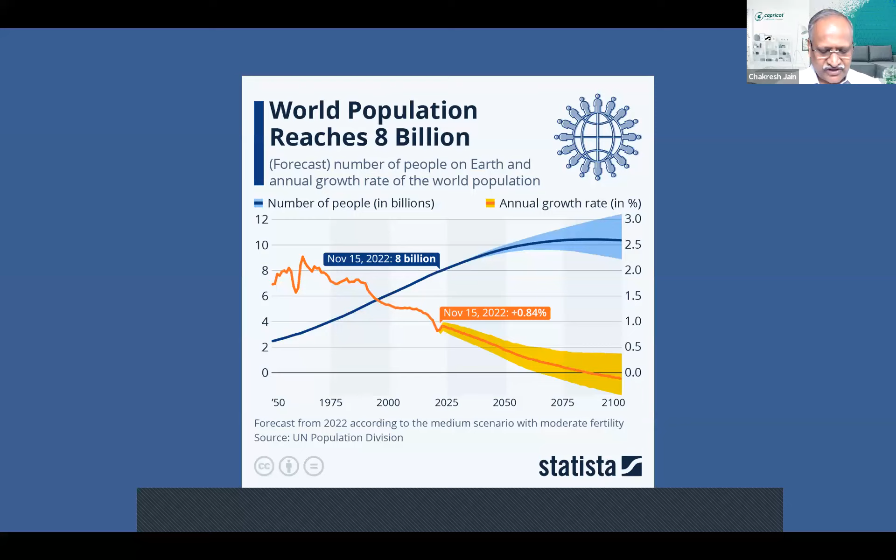The biggest challenge we are facing on this planet is we human beings ourselves. I'm sure all of you remember this date, 15th November last year, when as a human population we crossed 8 billion people on this planet. This is a global number. Of course, we are in India and we are more worried about India, and as a country we know we are somewhere around 142 crore population.

Our population has been growing. Let's take a very simple example of what is the impact of this population growth on us in the construction industry - that's why I'm showing these numbers. Let's presume that we as Indians are growing at about 1%. The fortunate part, as you can see in the graph, is that in the 80s and 90s we were growing more than 2%, but it has now reduced to about 1%.

So let's take a simplistic figure that we are about 142 crore and growing at 1%, which means we are adding about 1.4 crore Indians every year, or approximately 40,000 Indians getting added every day. So that's the number of Indians increasing.

Now, as part of the construction industry, this translates to needing to construct a home for each Indian being born, which means around 8,000 to 9,000 homes are required to be constructed every single day of the year. Look at the quantum of the problem we are facing in our country.

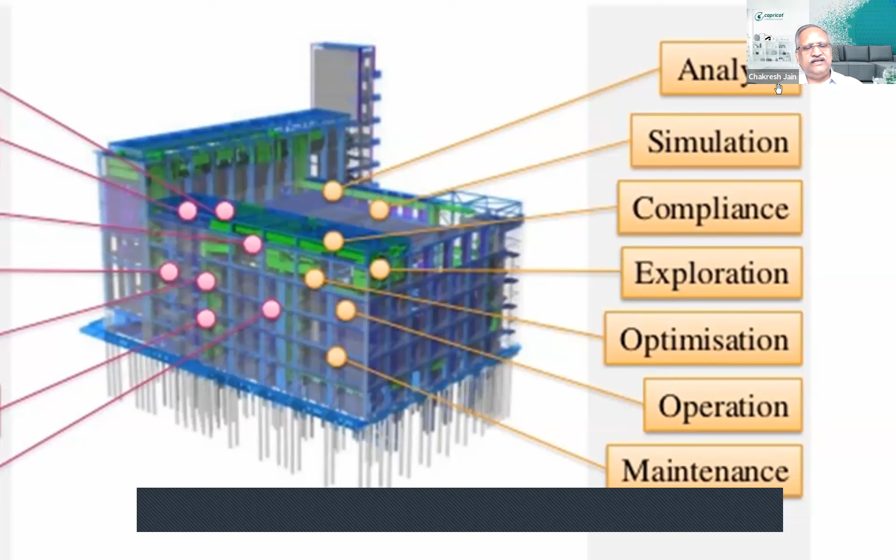And then that's why I should be able to explore my building and finally give a very optimized design. And so after doing this building, this same data I should be able to use for my operation and maintenance. So this is what I need today from a BIM, and that's what a good BIM software will offer me. But this is more about a building and physics and other parameters of the building.

But we know designing and constructing a building is a process, and a very complex, time-consuming process, like from the program to conceptual design to detailed design, etc. And we have to take a lot of decisions in that process. And today what is happening, because of the complexity, a lot of decisions are to be taken, and it takes a lot of time to take these decisions, and as a result the projects are getting delayed.

So another important requirement is, how can I speed up this process decision and bring all my stakeholders onto one single page? Can I bring all the stakeholders together so they can work on it? And in the long term, once I start digitizing this information, it will also become something like my shared knowledge. And as today we hear a lot about big data analysis, artificial intelligence, machine learning, all that will only become applicable once I have sufficient digital data. So this will also help in future to improve my buildings as I capture more and more information.

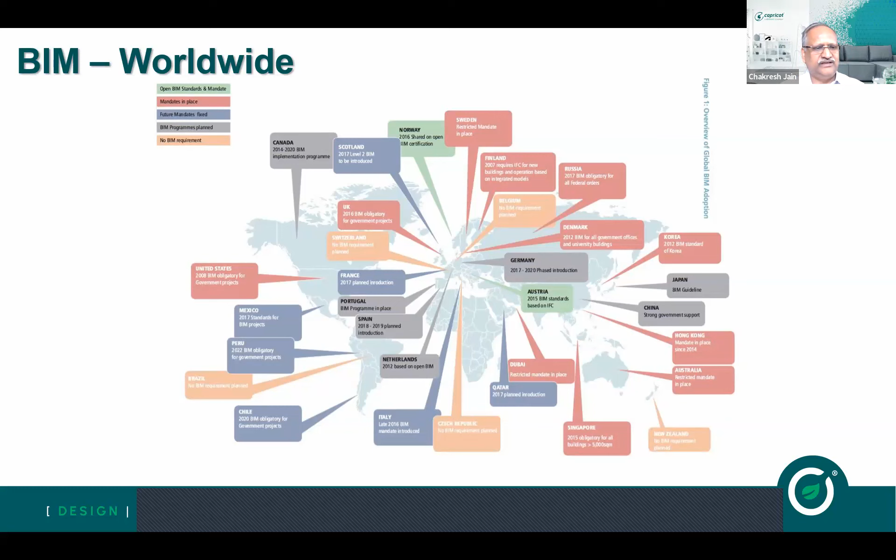So basically, we have to leverage technology for design using BIM. Similarly, in construction, lean construction processes are helping improve construction on site. Projects are now delivered using integrated project delivery, which brings a lot of people together. So using all these digital tools is what's helping us improve our projects.

Thank you. Now we get to an even more exciting part of the session, where we'll cover a practical demonstration of how BIM works. For that, I'll hand over to Shoaib, who'll work with his team on role playing a real life project. It's a demo project, but it shows how a real project starts from architecture, then structure, then MEP, and finally design coordination for optimum design management in a BIM environment. Over to you, Shoaib.

Thank you, and good afternoon everyone. I'll share my screen. I think it's visible now. So now I'll introduce my BIM team and we'll simulate the process of how a project is delivered on BIM.

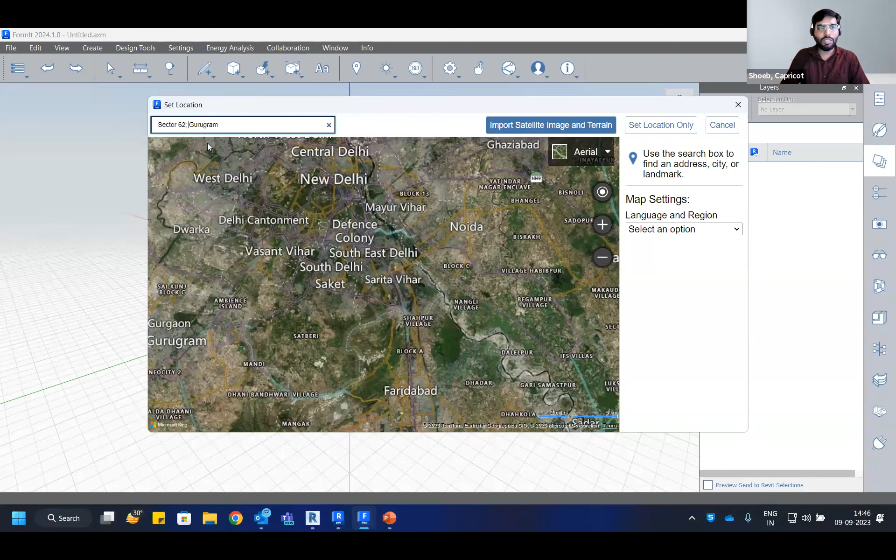So I'm going for the location. It actually allows us to pick a location anywhere, either by putting coordinates in degrees and minutes, or by writing down the location, such as Gurugram. It's showing me some results. I can be more specific, such as sector 62 Gurugram, and I get similar results. Or otherwise, if we have a location on Google Maps or Bing Maps, we can just put in the coordinates and it'll grab those accordingly.

So now I've set up this site, this piece of land, as my site plan. I can simply import not only the image shown here for reference, but also get the terrain data out of it, for contour creation. So I'm clicking on 'import satellite image and terrain,' which allows me to pinpoint the area and set up the building context.

If I'd like to include adjacent buildings to show the entire neighborhood, I can zoom out and set the area accordingly - so I'm setting it to this level, for example, I think this much would be fine. Once done, I finish importing, which imports not only the site context but also the terrain layer. Since this is Gurgaon, it doesn't have much contour, but if working on hilly regions, it will show the exact terrain. Anyway, I'm switching off the terrain layer for now.

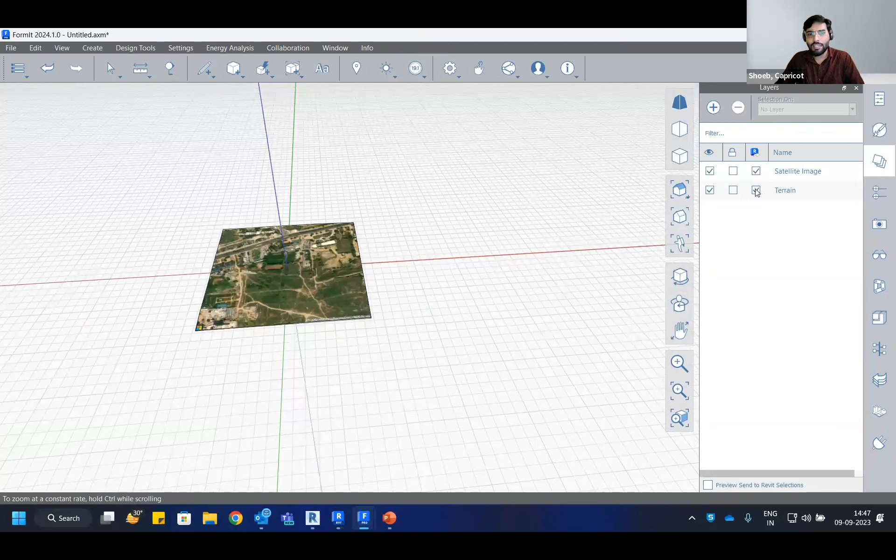So it has multiple layers, and now I'll start modeling over it. To start with that, we can use multiple unit systems, since multiple consultants work in multiple unit systems. The BIM ecosystem supports multiple unit systems. For example, if the architecture consultant is working in feet and inches, and the structure consultant is working in a metric system, and the MEP consultant is working in another metric system, maybe meters or centimeters, since BIM ecosystem works in 1:1 scale, we may switch between them at any time.

So I'm starting with meters, for example, and just creating some shapes here. You can start with 2D lines like AutoCAD or any 2D software, or you can start directly with 3D shapes. For example, if I put up a cube here, I can select this cube, stretch its faces to any shape, and get a form out of it.

Later on, I can also play around with this form. For example, I can interact with its edges, and also interact with its corners if required. I can replace the edges with another edge and get different shapes out of it. If I'd like to draw on the faces of these edges, that is also possible, so it's quite easy in that sense.

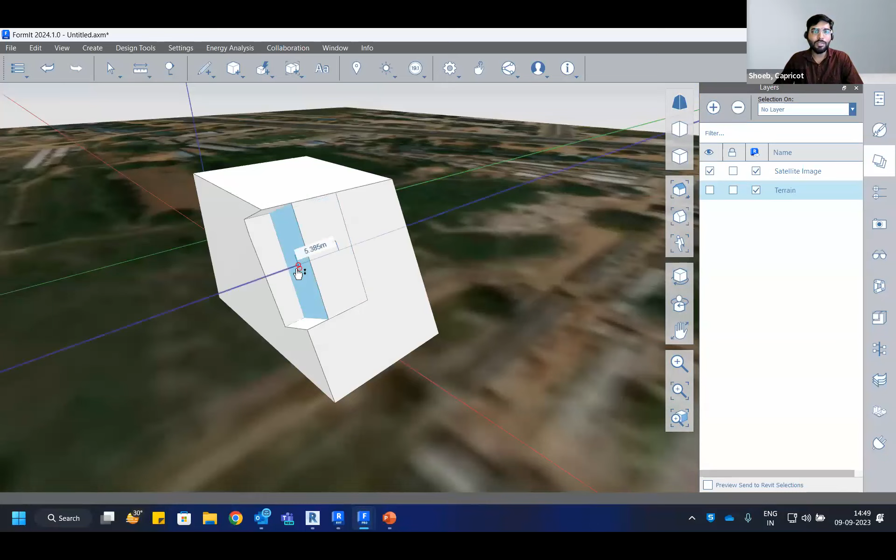For example, I've drawn this portion here, and I would like to push this portion away from this part, and a new possibility has opened up, something like this. I can do that on the other side as well.

Anyway, sorry to interrupt you. Yeah sure, let's go a little bit slower, there are some internet problems, some people have issues, let's try to go a little slower in audio and video. Sure sir, thank you, sure. So in this case, okay, I'll try to be a little slower.

So like I started with shapes, we can start with different shapes, or we can start with lines also. Most of you are already familiar with CAD-based software where lines are used. I'm also starting with, let's say, a simple square. I can freehand draw on screen and make decisions, and I can also put up exact values if required, like I'm doing in this case.

So it's a building footprint of, let's say, 13 by 71 meters, and I'm going for 5 stories, so I'm taking around 15 meters of height. I'm just creating another shape here of a similar size. You can go not only rectangular, you can also, if required, go for other shapes as well, such as circular or other interesting shapes.

So I'm taking a kind of similar building in this case. And obviously, not only linear buildings, you can also rotate them as per your requirement, so all of those features are here.

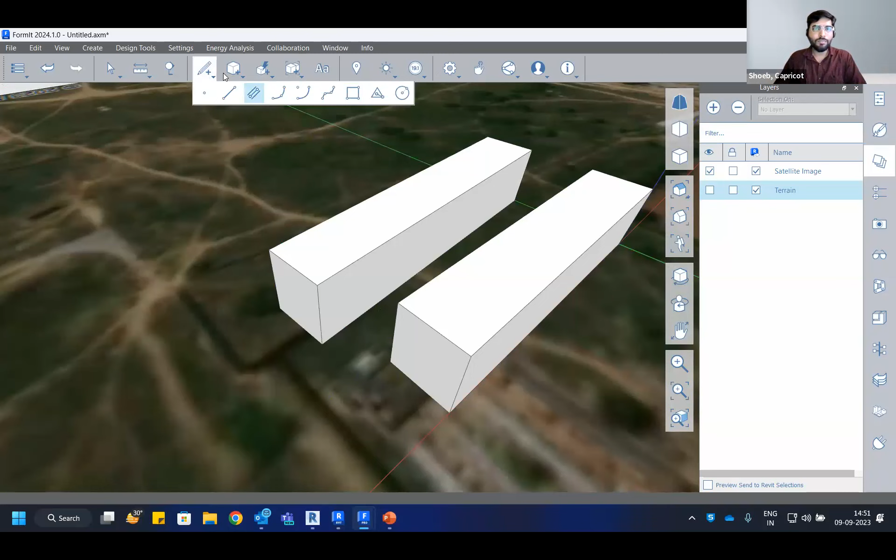So now suppose these are two building blocks, one slightly rotated, and these are both connected via some corridor. I'm trying to connect it with a corridor, and suppose this corridor is not of full height. It has got some passageway below it, suppose a 3 meter or 3.5 meter passageway below it, so that people can pass under it.

So this is the conceptual form. Once a form is completed, you can put up material to it. I'll just show some material capabilities, it has a bunch of materials already available, and you can also create your own material. For example, if we need to put up a concrete facade, suppose one side is fully concrete, this entire block has been converted to a concrete block.

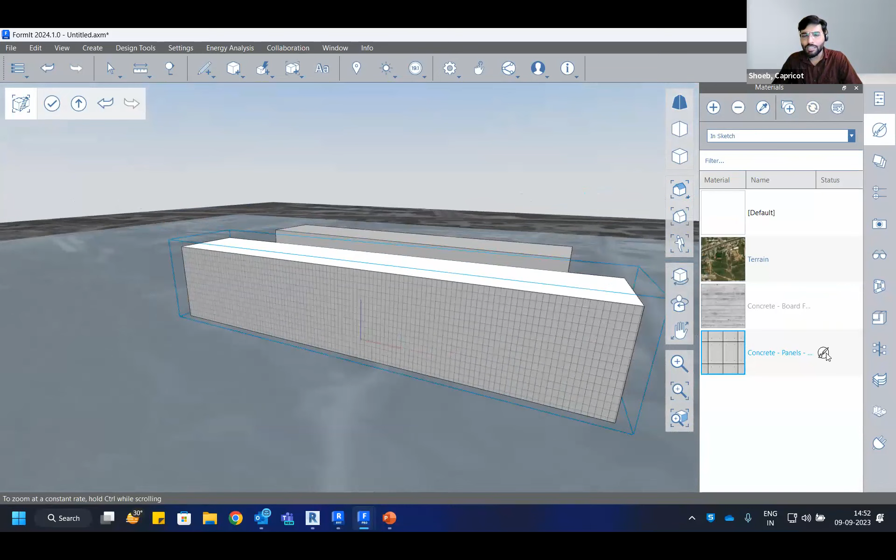Obviously we'll go side by side, so I can also get into different materials. Suppose the surface of this side is concrete panels, let's say precast panels are to be placed in this case. We can also change the size of the material as well. Anyways, you get the possibility here.

Similarly, since this building form is created for 5 floors, keeping that in mind, you can also add multiple levels to it. So I'm adding levels in this case. Suppose the first level, I'm adding at a height of 0.

Okay, another level I'll add at 3.5 meters. It is fine. You can also change the height from here, suppose if you need to change it. Similarly, another one is going for 7 meters. Now I'm keeping the rest of the levels at 3 meters each.

So I'm just keeping it at 3.5 plus 3 meters, that is 6.5 meters. Similarly, I'll add more, that is 9.5 meters, and let's say another level at 12.5 meters. So the first story is 3.5 meters, rest are 3 meters each.

And now we can assign those levels to this entire thing. I'll just simply go to its properties and assign levels to it. Just a minute. And as soon as I assign those levels, you may see the level marking in the conceptual model, and if I select one of the elements in the form, you may notice each level is showing

its area. So it is showing in square meters. Suppose if you want to change it to another unit, let's say feet and inches, then it's just one click away, and you can simply select the components. In this case, building forms and their areas are shown in square feet, as you may notice. So these are the levels, and their areas are shown. So this is that dynamic in this case, right?

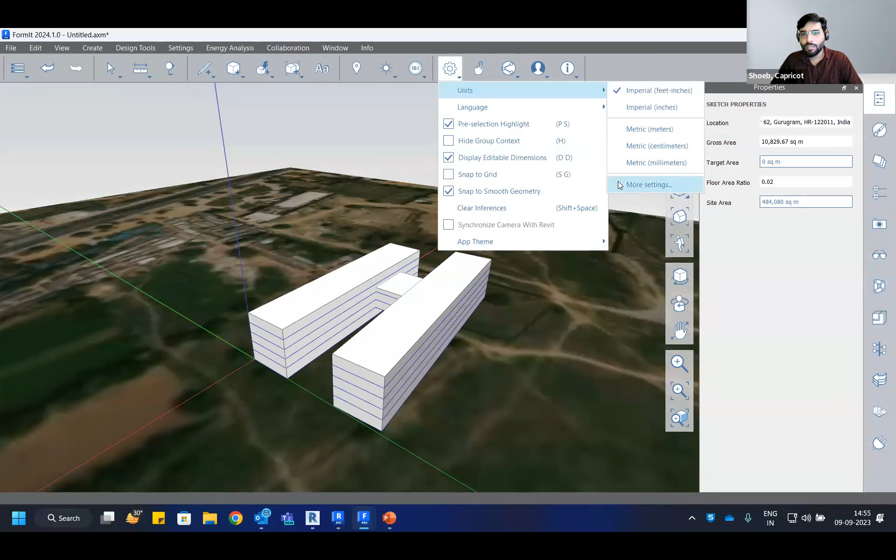So in this case, I'm putting up the site area which is to be designed for this particular site, that is 484,080 square feet, not meters, sorry. This dimension I had in feet, so I'll just simply change it. Just a minute. Okay.

And then target area, I'm setting up to, let's say, 90,880 square feet. So it is now converted. Sorry, this part I need to again fill up because it is just updated.

Whatever site area you have, you can just fit that, and then you can also feed the targeted area which you want to achieve, such as in this case, this is the target area, that is about 20% of the site area. That is what FAR allows me for this particular region. And automatically FAR is being calculated in this case, right? So you can keep track of it.

For example, if I make changes now, suppose if I reduce the height here, as you may notice, FAR starts to reduce. Similarly, if I increase the height here, suppose it's a larger building, then accordingly FAR starts to change. Just a minute. Sometimes it takes time to update, but yes, it updates automatically.

I need to add more levels in that case. So earlier it was 0.19. Just a minute. For example, if I reduce it, you may notice the change in FAR, that is 0.17. And if I now change it back to the original height it was, it will be around 0.24. For a larger building, we need to add more levels. So as per the addition of levels, the form whichever we are creating, we can also track FAR accordingly.

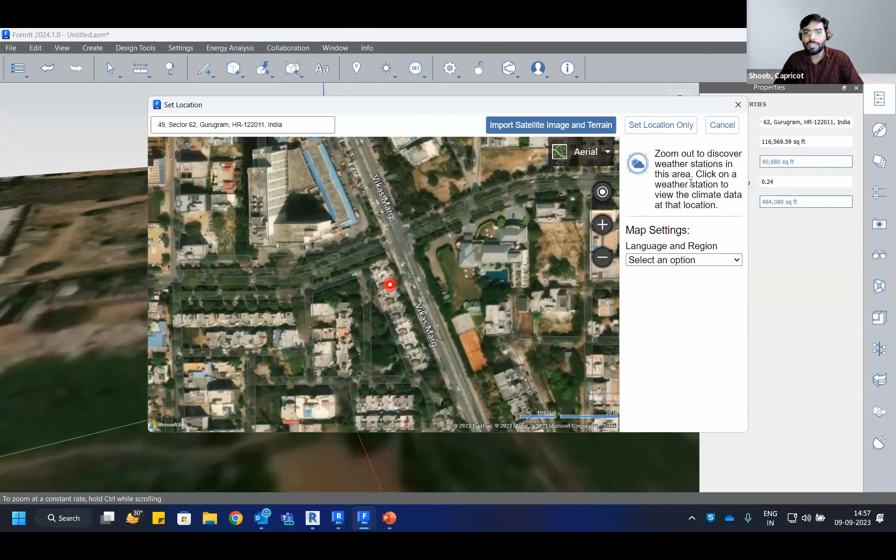So once a basic form is created, you can also run an initial level performance analysis on how our building is going to perform under sunlight, under different weather conditions. So when I set up this location, it not only sets up the context of the site, it also sets up the weather location. As you may notice here, it also sets up the weather station for us. So we not only set up the location in context of the project, we also set up the weather data, which can later be used for energy analysis or HVAC analysis.

So in this case, if I need to run an initial level solar or shadow analysis, I can do that. But to do that, I'll just change the visual style.

I want to keep it as the monochrome surface so we can see the shadows and colors properly. You can also change different visual styles - it has different styles available for presentation purposes. So I'm switching on shadows, for example, and also the sun editor.

As soon as I switch on sun editor, it allows me to simulate the sun location in my project. This sun symbol is at 12 p.m. I can simply drag the sun manually, and as you may notice, the shadow is being tracked. This is how, if we're working with multiple buildings, we can identify the areas which are darker throughout the day, and plan accordingly if we need sunlight at every area, or if we need to keep some areas under shadow.

Similarly, if I run solar analysis, I can choose date and time accordingly, and solar analysis will start. For example, I'm taking today's date, although we usually design for the future. I'm taking the month of June - June is fine for me - for this year, 2023. You can write it down, or choose the year accordingly.

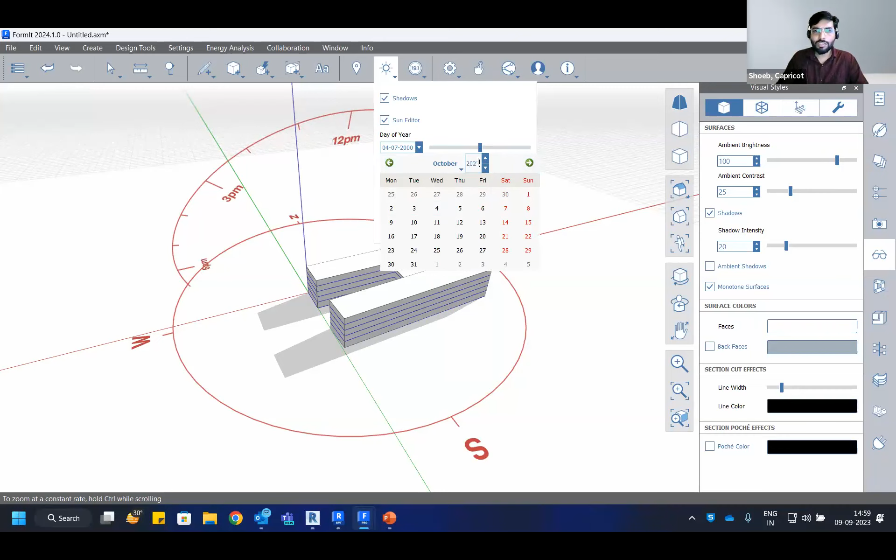For some reason it's not updating, but no issues - sometimes this takes a moment. Anyway, this weather data is kind of similar for the entire year. You can change the months and dates accordingly using the slider, and for year you need to change it from here.

Similarly, we can change the time from the slider as well, or manually position the sun. For example, I'm keeping it around 10:30-ish a.m., or maybe around 3:30 p.m. - that's the peak hour for sunlight, the most sunlight usually. I'm testing it for the month of June, maybe this month, 3rd June, and I'll hit solar analysis.

It will start collecting data and allow me to run solar analysis on a monthly and yearly basis. I'm going for monthly basis in this case, and I'll select the surfaces where I want to run the solar analysis. I've selected the entire project. You can also select faces - for example, I only want to run solar analysis for this face individually. That's also possible.

For example, this face is crucial because it's going to place some glass on it, and I want to decide if the glass needs to be more or less reflective. I also want to decide the type of glass according to its SHGC value - how much solar input it takes. So we can decide this for a particular surface as well.

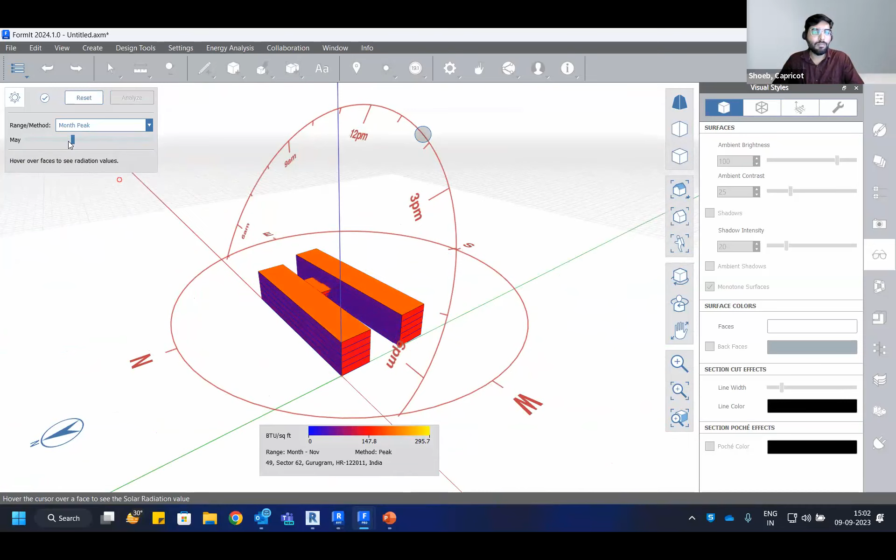You may notice different surfaces are highlighted using different colors for different months. I can change months from here - in March we get lesser sunlight, in February even lesser, and for November, December even lesser still. If I go for May, June, July, we'll get the most sunlight at the roof and facade. We can also get it for the years, so I'm moving within months.

I can also get the cumulative - that is, average sunlight for the entire year. This is how you can decide at the very initial stage if the orientation of the building is correct or not. Once decided, you can simply push this model to detailed design software.

This is the conceptual design software, so I'm just saving this - you can save it at some location. I've already saved it, so I'll show you the almost completed model.

This is the model where we already have terrain and satellite data available, so that satellite data and all those levels can be transferred. Let me save it - no issues, I'll save it again. This was from yesterday's input, so I'll save it on the desktop for today. Conceptual form, I've just saved it.

Now I'll go to detailed design software. The BIM ecosystem has, like I said, multiple software.

So this is part of the collection. In this case, you can simply use that same model to do the detailed design. Although this software not only supports the architecture part, it's a multidisciplinary software.

I'll just show you the basics. You can choose multiple templates out of it—these are some predefined templates. You can also create your own standard template as per your discipline. If you're a mechanical engineer, go with a mechanical template. If you're doing entire MEP, go for the systems template. If you're an electrical engineer, go for electrical template. Similarly, there are architecture, structure, and construction templates.

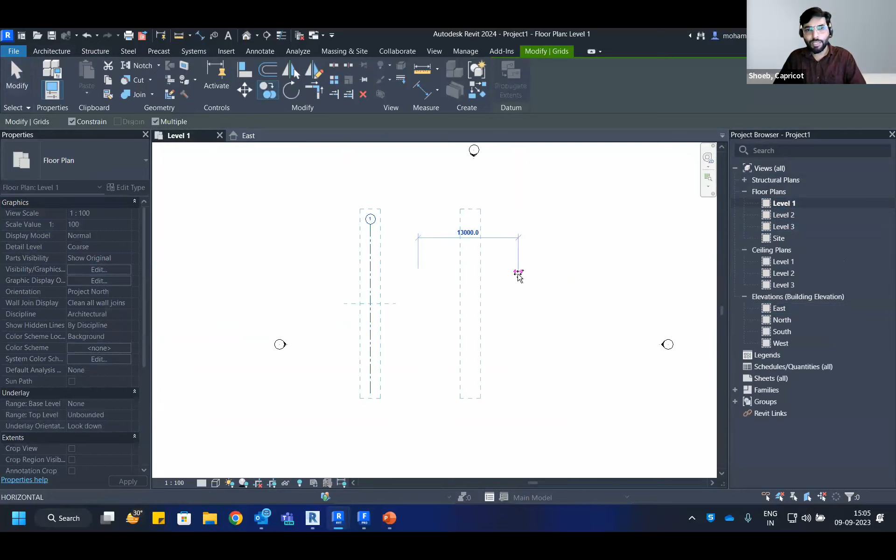I can put up grids for a project. So suppose this is the first grid I'm putting up, then let's say at every 6 meters, I'm putting another grid.

This same grid can be used by other disciplines as well—suppose the structure engineer needs to place grids, they can also use the same grid, or they can put up the grid in this file and send it to the architecture team. So both ways it works, and usually structure and architecture teams work in collaboration.

Anyway, suppose on this side I'm going for, let's say, 8 meters of gap. So these are some grids I have placed, and now I can start creating walls for the architecture purpose. If a structure person is working, they can start with the structure columns and structure components, which Vatsal will cover in the upcoming session.

Anyway, I'm going with the architecture wall, and suppose this wall is starting from this level and going up to the level above, so I'm going up to level 2, and I'm just placing a few walls here.

After placing walls, I can simply place interior walls, and suppose the assembly for interior walls is different—in that case, we can choose another wall from the given list. If we need to create our own interior block work or interior partitions, or for exterior walls too, we can simply modify these components.

It has properties that allow us, for example, if I choose one of the interior blocks, which is 100 in this case, you may notice it has the preview for it, and it has 3 layers—it has concrete mesh in between and gypsum on both sides. Similarly, we can go for wooden partition or glass partition if required.

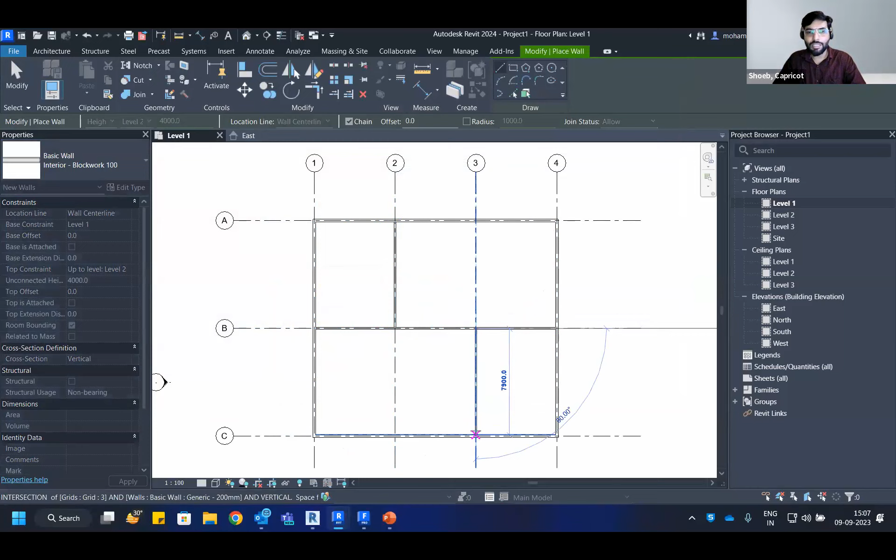Anyway, we have the choice to select the material at the initial stage, and later we can also modify these assemblies as and when required. For example, these are a few rooms which I've placed. I can simply control the visibility of the layers—so these are different layers.

So I'm just keeping the grids layer a bit lighter, so that I can focus on these wall layers. And as soon as I'm creating all these walls, a 3D byproduct is also created. So this is the 3D view, as you may notice, I've just turned it into shaded.

So 3D is also being created side by side, and I can keep it side by side. So I'm keeping a side by side window, 3D on the left hand side and 2D on the right hand side. So like we used to work in AutoCAD, we used to work in 2D, similarly I was working in 2D view, and 3D was automatically being created in this case.

So suppose now if I need to add doors and windows in this project, I can go for the door tool. I can place a door here, choosing one of the sizes, or I can load it from the library. I'm keeping a door here, similarly I'll keep one door at this end, and to enter this room I'll keep a door here, and a door here. So as you may notice in 3D view, doors are automatically being placed.

Similarly, we can also put up windows if required, and obviously it is required in most projects. I can choose the size of the window, and simply place that.

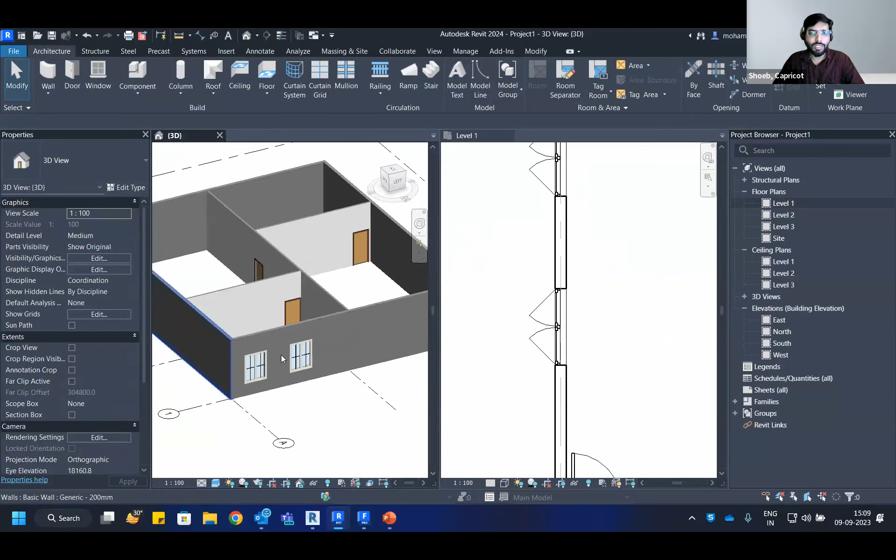You may notice here, the door placed in plan view is showing a 2D line additionally, which shows the swing of the door. Similarly, windows are also showing the swing of the casement window. But if I check it in 3D view, it shows the 3D preview of that. So in this BIM ecosystem, software is smart enough to change the representation as per the view.

So in plans, mostly we create floor plans, and as per floor plan graphics it automatically updates the component. You can also control the graphics as per your design standards. Suppose in some offices you need to show this opening line of the door in dotted line, then that is also possible. This is the default which I am showing. Similarly, we'll place more windows, and accordingly it will allow me to.

So we actually work like in AutoCAD in this case, a little more automated, like we place blocks in AutoCAD. Similarly we are working in the same manner, but 3D is automatically being created. Not only 3D, if we need to cut a section through it, I can go to view and choose any new view to create. Section is one of the additional views for this BIM software.

So I'm creating a section. I can also control this section's direction and its extent, to what extent I want to check my section. I can also rotate my section if required. So a single section line can also be used for reviewing the entire project.

Anyways, so I'm going to this section view. It accumulates all its views at one place, and this is the section view which can be seen in this case. I'm turning it into shaded.

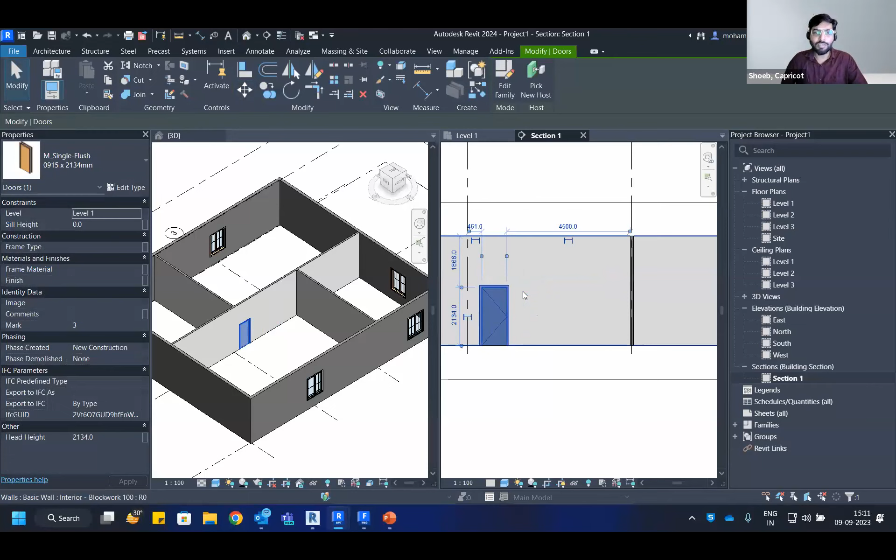And if I shift it to the left using arrow keys, it is as simple as that. Or you can use the proper move tool, and specify the dimension - suppose I'm moving it by 3 meters, and it moves accordingly. So in this case, in both 3D and 2D view, this door has been shifted. This is that door, right?

So I hope you got the idea that this ecosystem allows us to create views which are connected with each other. So if we are making any changes in the 2D view, 3D view, or any section or elevation, subsequent views will automatically update. Not only this, it also allows you to get quantities and all.

So the rest we'll do in the project which we brought from the conceptual design stage. This is how you start from scratch in this software, or maybe you can get a conceptual design model from another team, or from the senior architect, and then keep moving forward. I'm using the same template again, the architecture template, and I'll link that conceptual model into it.

For linking, I'll just link it like a CAD file, which I just need to change the format. So in this case, I created this conceptual building form, and I'll just open it. Import units in this case would be feet and inches, so we can also work with dynamic units.

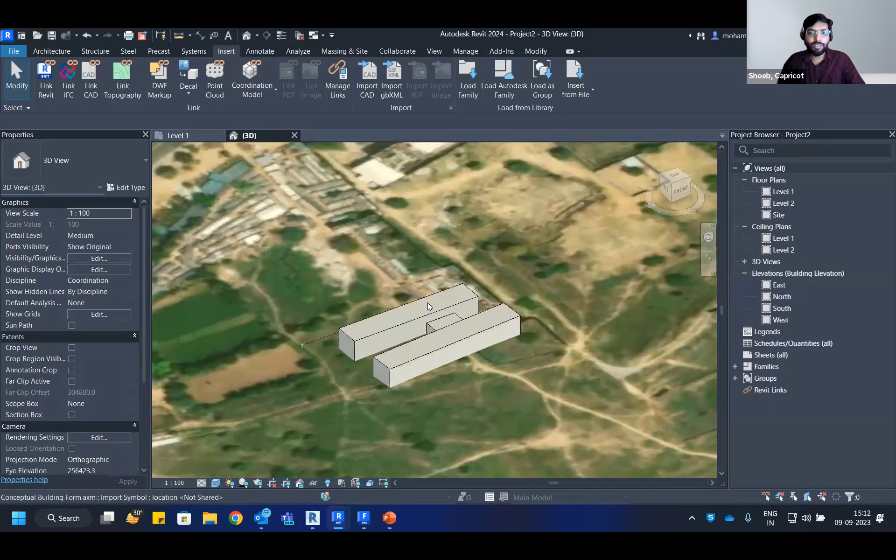I'll open this, and as soon as you place it here, if I switch to 3D view, and turn it into shaded or realistic, you'll notice that the site context has also been brought here. So the site which I chose for Gurugram, along with its contours, are also brought into it. For now, we are not going into the site development detail, but you get the idea that the entire thing can be brought here.

Anyways, I can still control its layers which we created there, such as the satellite imagery layer. If I apply it, it will switch off, and the terrain layer will switch off accordingly. So this is the layer where our component is created.

Now, what we can do is pick up its edges. I can also create levels in this case. I'll switch off the terrain layer in this view as well. This is the elevation view, and there are two levels which are already placed.

The first level was 3,500 and the rest were 3 meters each. It was created in such a way that there were 5 levels, 5 stories basically. You can put up dimensions as and when required, and also make it print ready.

If I turn it into shaded, this is the basic mass. If I need to convert it into actual building forms, let me go to another elevation to properly manage its levels, since these levels are overlapping with the building form. Anyway, it's a very small thing, but you can adjust it accordingly. If I adjust it in 2D view, it is also adjusted in 3D.

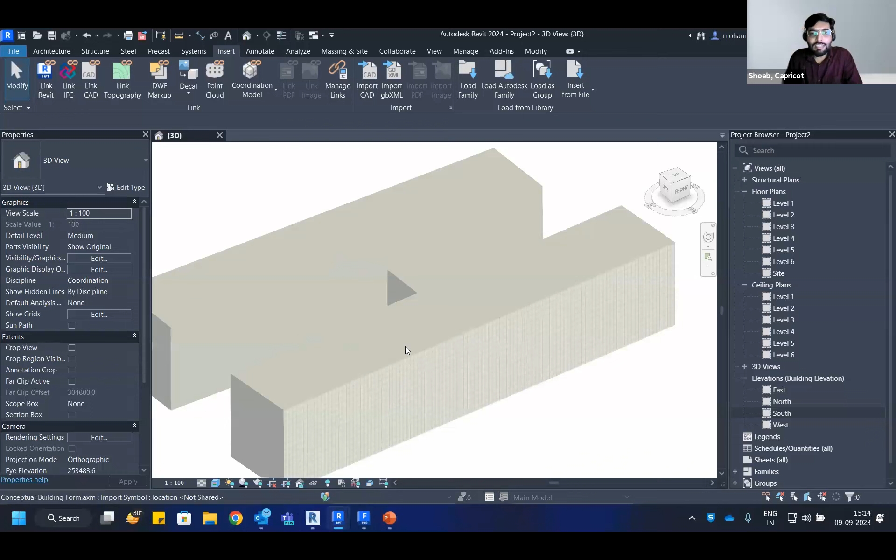Earlier it was overlapping. Anyway, now moving ahead, I can go back to plan view for this conceptual design form. Suppose I'm choosing the site plan, and I can go for building components such as wall, and pick its surfaces and lines. I'm just choosing the type of wall which I'm going for.

Let's say in this case, I'm going for some kind of brick wall system, and I can simply select the edges. As you may notice, these edges are being converted into walls. Later on, in 3D view or 2D view, we can control its height and all.

So suppose if I go back to 3D view, these walls which I just added, I'm connecting them to the entire levels, from level 1 to level 6. So these are those brick walls, as you may notice, because that was the intention to place it. And then I can also place roofs and all.

If, for example, you need to place some glazing, we have options to switch between. So I'm going with, let's say this time, glazing wall. We have options available, and I can simply select the edges of it. As you may notice, a glazing wall is being selected in 3D also.

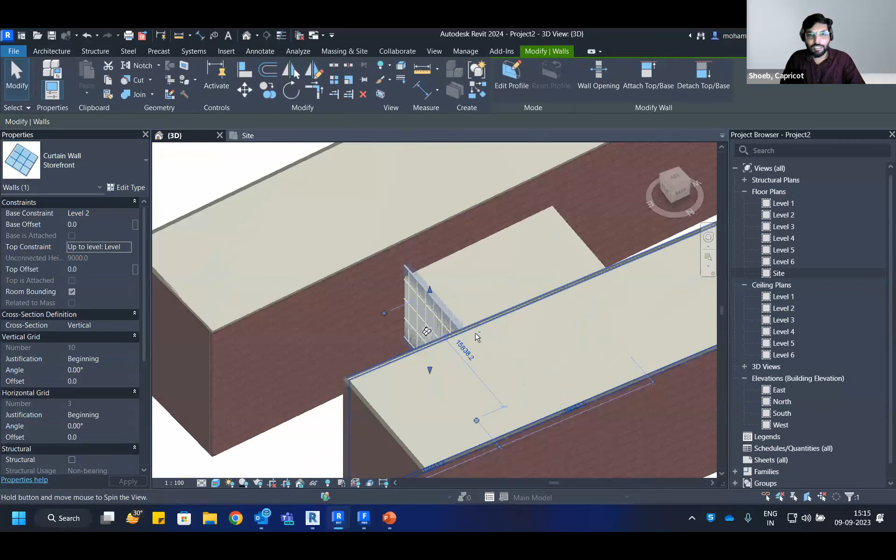So you can work in 2D as well as in 3D if required. Suppose the height of it starts from level 2 and goes up to level 5 in this case. So accordingly, we can adjust. Similarly for this side also, it is started. So this is the kind of connecting corridor in this case.

And so the entire design can be carried through, so you won't lose anything in the process. Usually when we switch from one software to another, we lose a lot of data. In this case, since all of these tools are of the same BIM ecosystem, whatever we created in the conceptual design tool is now brought here and further detailing is done.

So I've already created the model completely, so I'll just simply switch to the model. We have added a few doors and windows and a few elements into it. Obviously you have already seen how to place windows and all.

But if you are into programming - although not everyone is - if you want your software to automatically place many things, if you want to run an automation in your design, you can take help of the software's capability of handling basic programming. Obviously this is not for everyone. If you want to place your windows and doors manually, that is also fine, and that is how most people work. But if you want to get more output in lesser time, you can also automate the process.

To automate that, I've just recorded a few sessions for automation. So this is how a script of automation looks like, right? This is the automation script. Those who are interested can also learn this later.

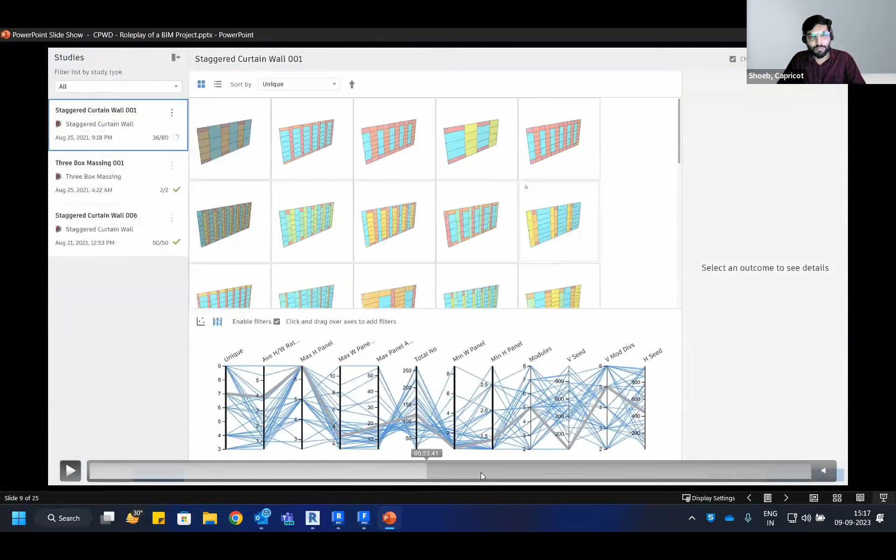So what we did, we actually picked up all those walls which we created and divided them into multiple panels, and then we placed windows in between. We got some panel options in this case - these are different options we played around with, and this is the simulation of the process. You can also run multiple design options into it.

For an architect, this is a challenge - we produce 3 or 4 options for the client, and sometimes it takes a lot of time because a lot of rework is done. But by using some automation tools already available within this BIM ecosystem, you would require some programming knowledge, and then you can also run multiple design iterations out of it.

This is the simulation of that - so this is how I actually came up with these facades. Especially for this white one, we actually ran those simulations.

Anyways, so this is the completed project. Like I mentioned, we also placed internal walls, and these are the floor plans which can be shown in this case of the same project. This is the architecture part of it. Obviously there's a structure part, which later Vatsal will cover, and the MEP part, which another person will cover. We also get a reminder for saving the projects in between, and it's a good thing.

So I've already placed internal walls, I've also placed text in between. We also can use it for tags. Like I showed in elevation, we can also put up dimensions, and this entire floor plan is kind of ready. For presentation's sake, we can also add colors to it.

So for example, if I need to add colors according to the spaces which are placed here - this is the game room, this is unit 1, this is the RA unit, this is the laundry area, this one is the toilet area - we can color our areas as per the name of the rooms.

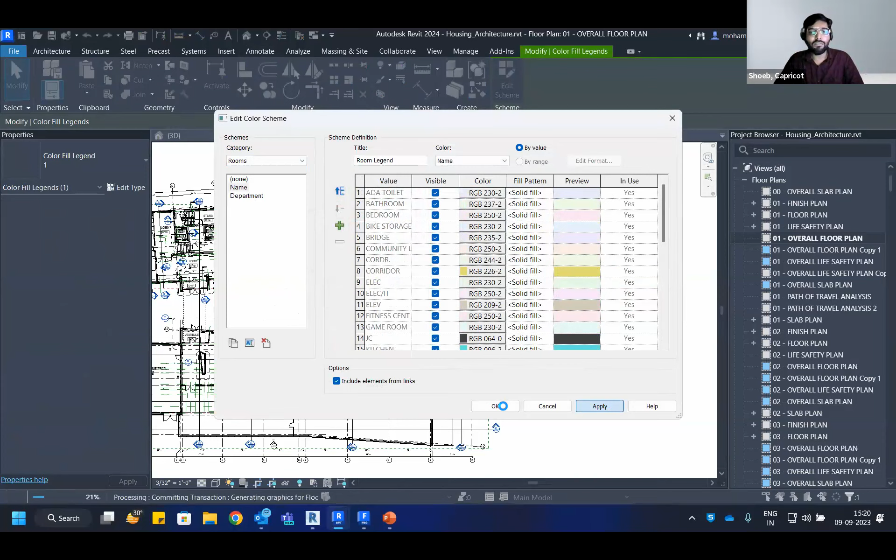I'll just accept it, and once I accept it, our entire floor plan will be colored automatically. So it is calculating, and once it is colored, a legend with colors and our entire room - oh sorry, I think I mistakenly switched off the layer of the colors room. Just a minute.

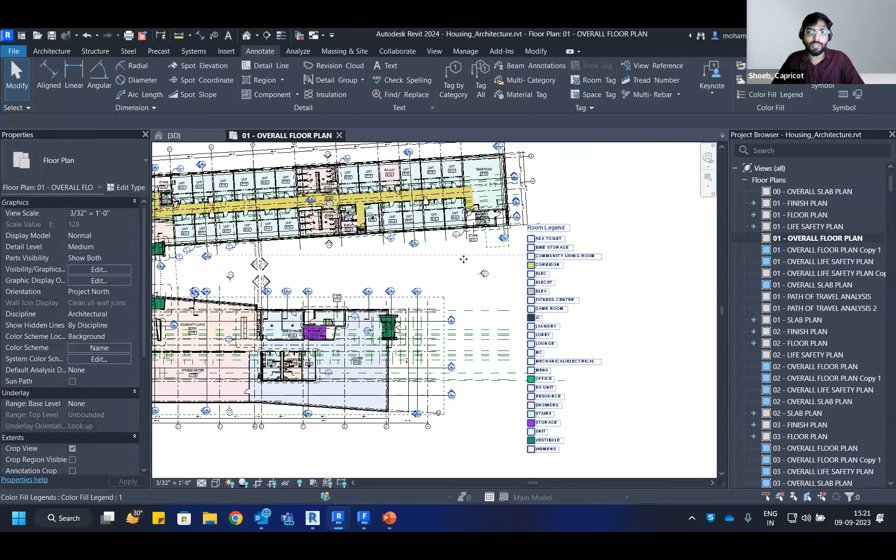It converts to the area, and now different areas, similar areas will be colored similarly, and different areas will be colored with different colors. So it is again recalculating as per the areas, and it will show you all that. It is going live, so it takes a few seconds. And as you may notice, as per area, it is showing.

You can also set up the range for the area, like 8 square feet to 12 square feet, 12 to 17 square feet, or 100 to something like that. So rather than going by value, you can go by range as well. Anyways, for now, I'm just keeping it by name, but I'm just showing you the possibilities which are available in this ecosystem.

So once it is done, you can also put it on a sheet. It is now recalculating according to the names, I just changed it. Yeah, so now once it is completed, I can just put it on a sheet.

So to create a sheet, we can just simply take our standard title block. If in your company you have your own sheet format, you can take up any sheet format and place it there. I think I've already created a sheet. So you have so many sheets in this project. This is the sheet which I created, and I can just simply drag and drop that

floor plan view. It is under the floor plan, and this is the floor plan which I was working on, right, the overall floor plan. So I'm just simply dragging, a simple drag, and I can just drop it on the space of the sheet. It is as simple as that. We do not need to get into the make viewport or similar command. It recalculates, and we can just place our view accordingly.

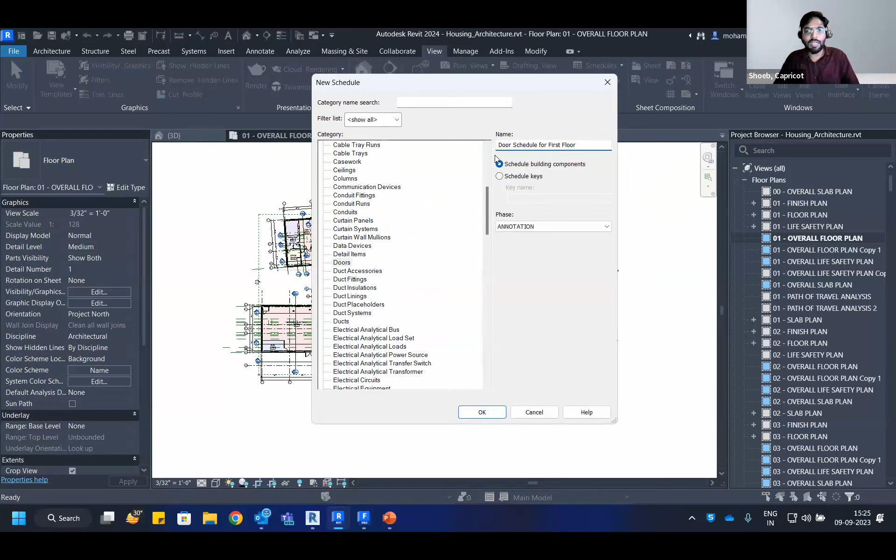For example, I need to get a door schedule, so I'm just creating a door schedule for, let's say, the first floor. I'm only sticking to the first floor, but you can go for multiple floors at a time. So I'm just going for first floor. This is the first floor drawing which I'm showing you. And as soon as I chose the category, I can choose the properties of the category, such as what type of door we are using.

What is the mark of the door which we are using? What is the width of the door? We can also go for height of the door. These are door related properties. If I had chosen column, we would get column based properties. If I had chosen wall, for getting the schedule, we would have got the wall based properties. So whatever category we choose for scheduling and getting the quantities, accordingly properties will be shown.

I'm choosing this much, and I'll also take the level on which the doors are placed. I'm sticking to filtering out, so I'll show you the result first. This is how the entire table will be shown. I'm filtering out only first floor in this case, that is the plinth level, right? So there's plinth level, first floor. Actually I intended to go for first floor, and there are first floor levels available.

So I'm simply adding the filter for a particular level. Suppose level equals to first finish floor, yes, this one is I want to go for. And you may notice these are first floor doors which are shown in this case.

Similarly, we can also add more fields there. Suppose if we need to add cost and all, we can get the cost out of it as well. So suppose I'll also sort it as per. This is how we use Excel. There are many features of Excel which are inbuilt in this case, and we can also export it into Excel when and if required, right?

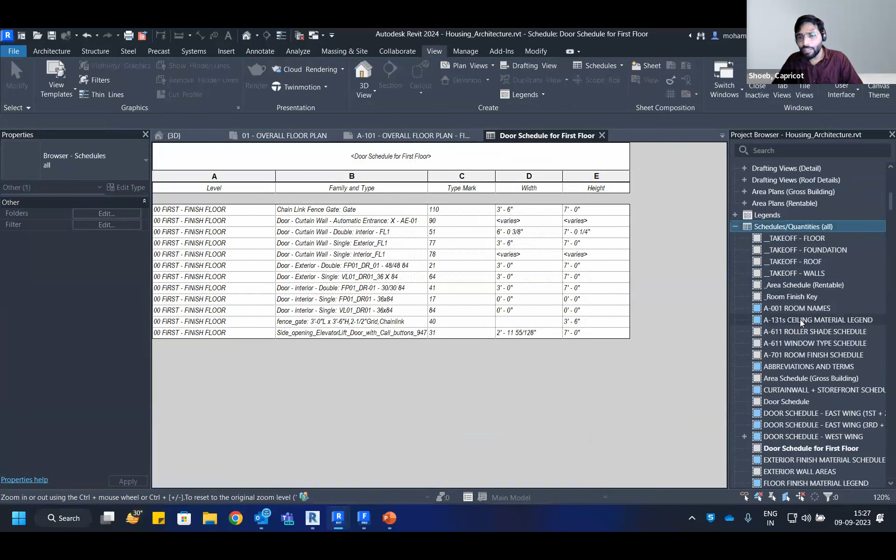Similarly, we created multiple schedules already, so for a project we can get multiple schedules. We already have a ceiling material schedule, so these are 3 types of ceilings which are placed in this project. This is the east wing door schedule, so we have also segregated door schedules. This is the east wing third floor schedule, this is the west wing door schedule. There are 2 wings you have already seen in the conceptual design.

So the idea is this is how a detailed quantity can also be taken, and this can also be placed on a sheet, and you can also link it with Excel or any other external format. So that was all from the architecture side.

Now, one thing I forgot is the visualization aspect of the software. From the architects and interior designers, it is also expected to get 3D views out of it. So we not only created 2D views, present in the form of presentation drawing or working drawing, we can also get quantities as you have seen, and we can also get visualization.

So now I'll not take further time. I'll just start the role play for the structure, and I would like to invite Vatsal Singhal for that purpose. So Vatsal Singhal will be role playing as a structure consultant now. Vatsal, I think over to you. You can start the role play for the structure modeling.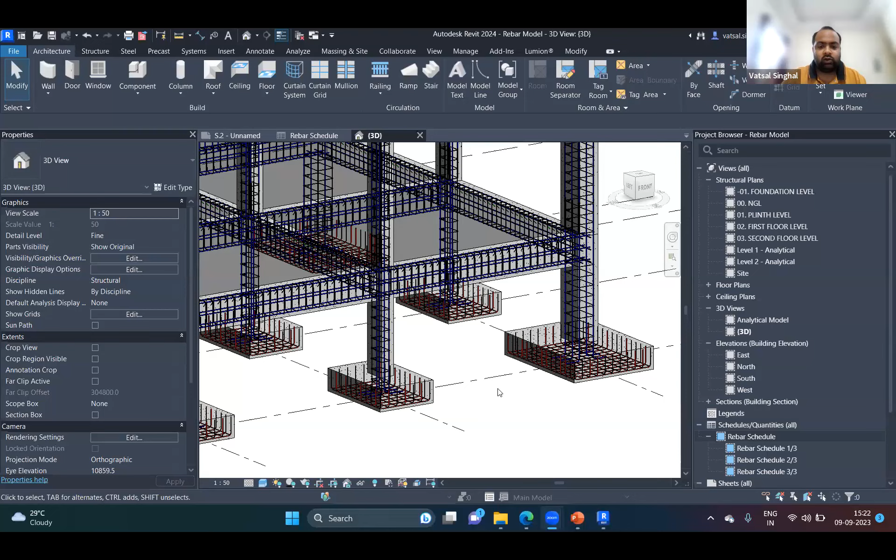So as Shoaib sir was explaining about the architecture discipline, now we'll come to the structure discipline. For this discipline also, we have the entire tool set: beams, columns, walls. In case of structure walls, architecture walls too are there. The floors are there, different types of floors, the architecture floor, trusses, brace system, everything required in the structure is there. Apart from that, steel connections are also there in this part. Also in the foundation, you have isolated footings, wall footings, and slab footing.

So if we just start from a basic part, suppose this is a rebar model that we've created. Suppose you have to place any foundations or any columns, I'll just show you how you do that over here.

If I just go to the different levels again over here, this is a small model in which we've done the rebar. Apart from that, there's also a model that we were already working on. I'll show you the basics: in the foundation level, I'll show you how you can directly place any footing, column, beams, that's it.

So I'll just make another grid over here first. I've just created a grid over here. On this grid, we'll basically place a footing and a column and some beams.

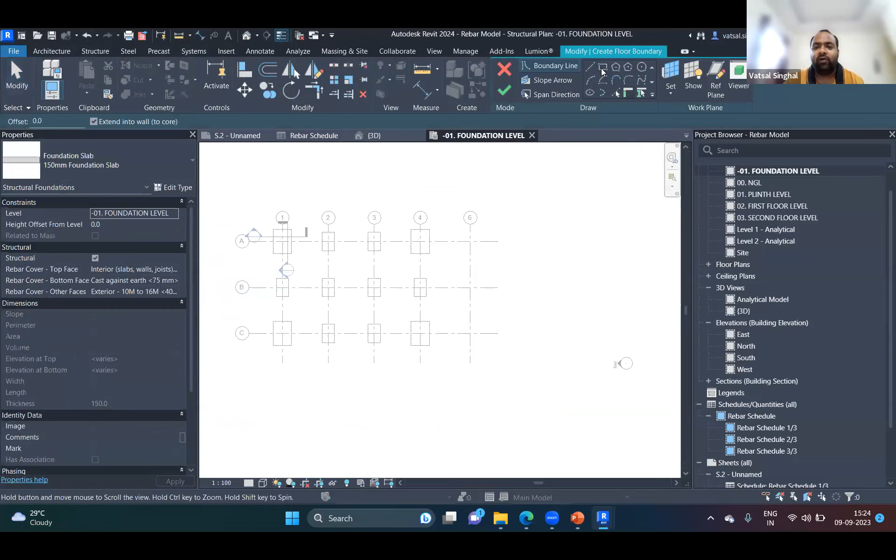If I just go to the structure tab, I have the option of foundations over here. This slab foundation, basically the raft foundation, in case you require any raft foundation, you can directly just sketch any type of foundation, suppose an L-shaped foundation or any other type.

If I just draw a raft over here, somewhat like this, you can directly make this too. If I just finish it and go 3D, you'll see this is kind of a raft made over here, a foundation slab. So we can consider this as a raft.

Let's go back to the foundation level, and I'll show you how we have the capability of placing all the structure elements at one go. If I just go to the isolated footings, we have different options where you can give different sizes of the footings. Already there are two inbuilt sizes over here, so you can either use these, or in case you have any other sizes, you can do that too.

Suppose if I go to the edit type property over here, the thickness can be changed. Suppose the width over here is 2400 and the length let it be 1800 only. If I just take the foundation, I can place it over here. Likewise, I'll place it on all 3 grids, and if I go to 3D, you'll see all these 3 foundations have been placed.

Apart from this, the same way we place the foundations, we can also place the columns. I'll take the columns - rectangular columns are there, and again you can change the sizes. You have different options. These are the structural columns, you also have the architecture columns, but those do not have structural properties. Basically these structural ones have properties which can be rebarred.

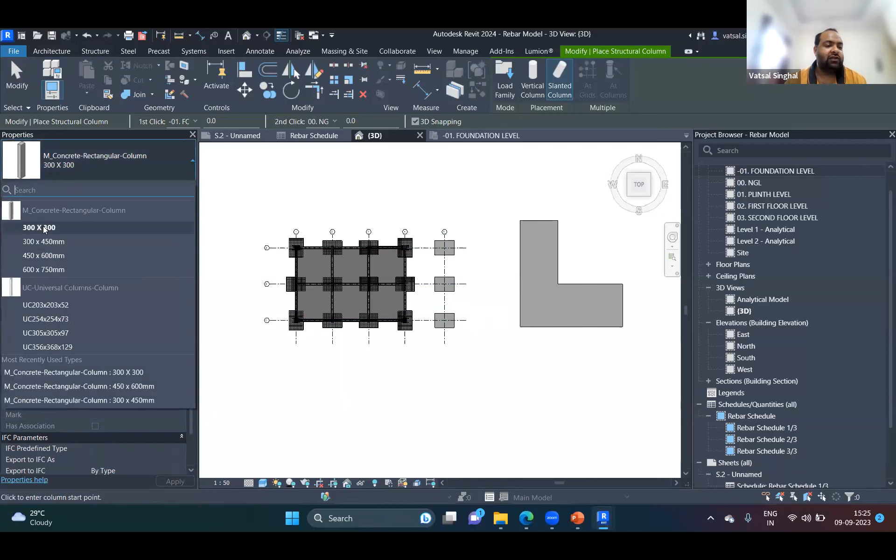So I've taken a column size of 300 by 300. From here, we can also give every depth and up to which level we want to take the column. So I'll just take the column, suppose to the plinth level, and then just place it over here.

I'll show it to you again - you'll see this is the column that is placed. Okay, so now it's actually going just below the level, so I'll give an offset of 0 over here, and I'll change the top level to plinth level.

So you can see we have placed the footings, we have placed the columns. Likewise, the beams can also be placed. Let's go to another level - and for beams also, again, you can take different sizes as required. Right now, we'll just place the size that is available over here.

And again, everything is placed properly. So this is how we can do the basic structure modeling.

Also, you have a different template for structure. So if I just go to the template option, I take a new project. There's a different option for the structural analysis default metric. Likewise we had for the default metric, we have for the structural options also. So we can use this and we can have the structural properties.

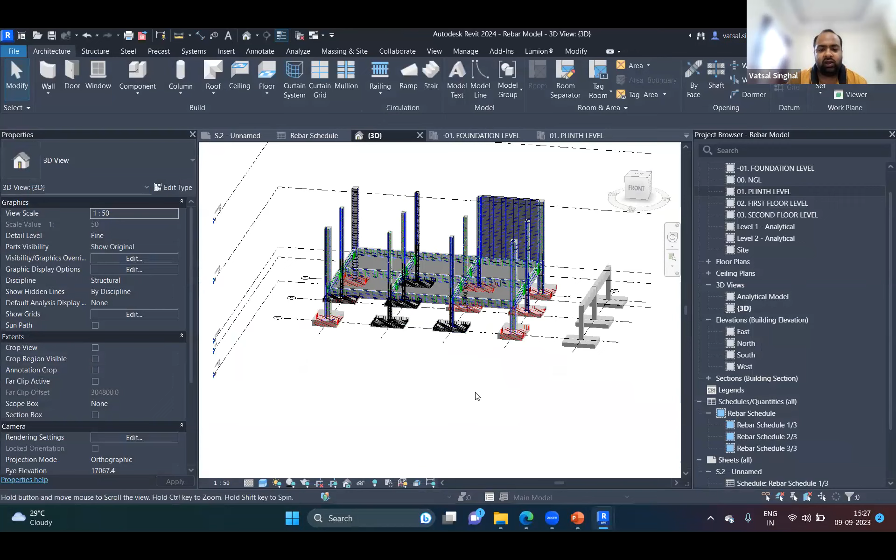So I'll just close this and get back to the model. This is a small model in which we've done the rebar option. We've rebarred the footing, the columns, we've given stirrups in the beams, we've given the stirrups and the main reinforcement. Apart from that, the proper column reinforcement has also been done. I'll just show that to you in a second.

Okay, so this is the raw model that we have. In this, if we start, we'll just go to the foundation level. We'll start with the basics. We'll get a section of the foundation first, a horizontal section and a vertical section, so that we can directly place the reinforcement in the footing itself.

So we'll just cut two sections and go to the section ones. Over here there are different properties. You can change the scale of the annotations. Also there are different modes in which you can see the rebar. So we'll select it and go to the options that are there for the rebar.

So we have multiple options of rebars, multiple shapes. Apart from these shapes, we also have shapes that we want to include ourselves. It's not like by default we only have the Autodesk shapes that are there. We can also sketch any type of shape that we want. So it's not compulsory to use these.

So I'll just select it again, go to the rebar option, and I have the sketch option over here. After taking the sketch option, as I said, you can give different options for the rebar. I'm taking a 12 rebar over here. You can also take 16, and give different inputs for different sizes for the rebar. So after doing this, we'll just sketch the rebar.

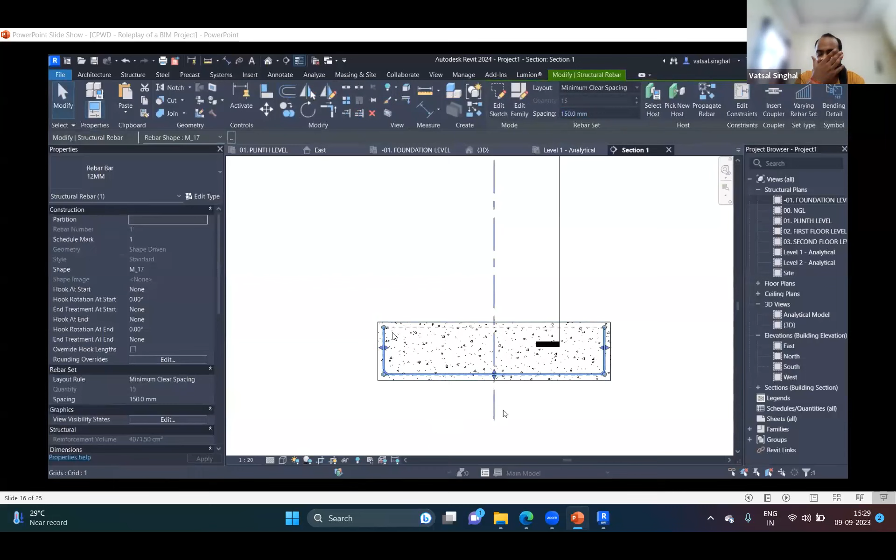So after sketching the rebar, we have to segregate it throughout the foundation. We have different spacing options where you can give a spacing accordingly, like 150 or 175 - in this case we've taken a spacing of 150. Also, we'll have to make it visible in 3D since it is only view specific. As you can see, it is placed in 3D.

As I said, due to the different viewing modes, you can change the visibility. Suppose you want to see it in a single line, or if you want to see a solid bar, you can change the visibility options too. Again, we'll just change the scale.

So over here, again, in the vertical section that was there, I have placed the rebar. Let's just go to 3D to check. Yes, so it is entirely placed over here.

Same with the column, since the column is being cut through a horizontal section at our levels. I'll take you to the NGL level, and over here we'll place the rebar. So just select the element and we get the options. All options are there, all capabilities are there to place the rebar, any type of shape, anything that you want is there. By default, as I said, there are some shapes.

So the stirrup shape that we require is by default present in these. We can just select it from here and give the input. I'm taking the 8 bar over here, an 8 stirrup bar basically, and I'll just come over here and place it.

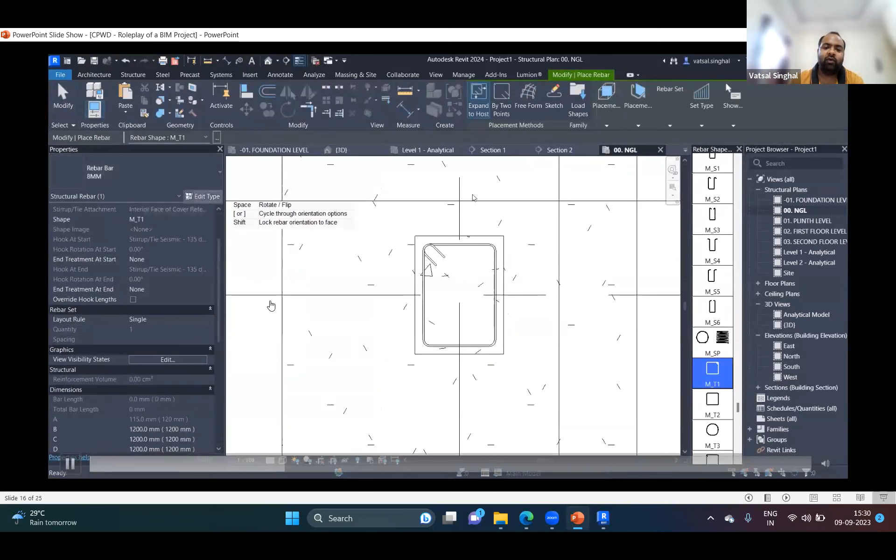We need vertical bars too in the column, so I'll be placing a 16 vertical bar. We'll be placing 16 vertical bars over here. I'll just show you the process, how it's done, and the capability of that too.

So we can also edit the shapes that are there by default over here. These shapes that we had, we can also edit them. Let's just look - there are different viewing options also, as I said.

So I've placed this bar. Now, if I just go to the 3D option again, I'll have to turn these on in the 3D view too, since this is view specific. So in every view that you want to see the rebar, we have to turn that through the visibility states that we have over here. So we'll just go to the 3D option, and over here you can see a single bar has been placed along with a single stirrup.

So this layout rule helps you to segregate these in different parts. As it is 150 over here, I'll be giving 175 instead. We've given a 150 spacing over here. Here we'll be giving a 175 spacing. So I've given a 175 spacing.

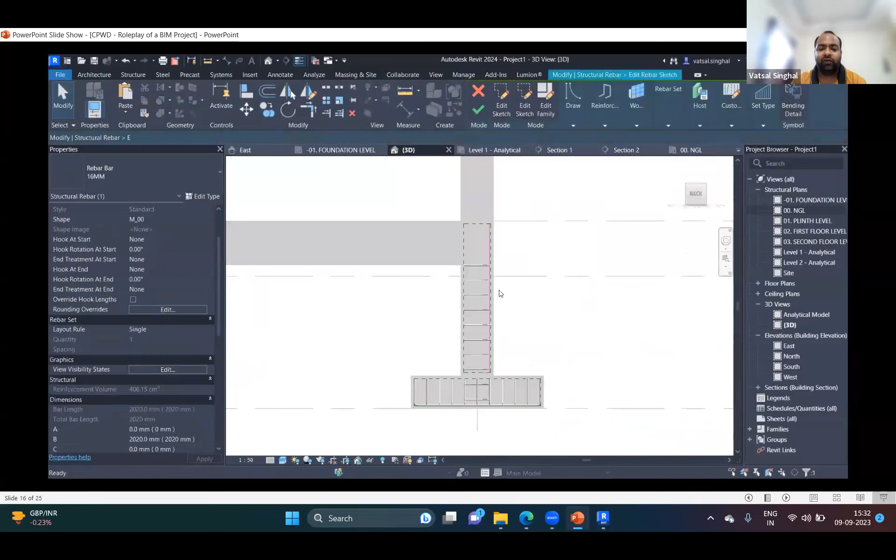Also, this bar needs to be turned. So as I said, the default rebar properties that we have over here can be changed, right? So I have this bar, I can change the shape of it. This is an inbuilt bar that is there in the software itself. So I'll just drag it down and turn it at a lap of 300. Also, these bending curves are by default available. We don't need to give proper curves and waste our time in that.

Again, we'll go back to the NGL level, and over here we can just segregate it again using the rebar set. If I just show you, this entire column has been reinforced, right?

So we've now gone to the first floor level so that we can place the rebar at the above level too. There are a lot of options that can be used to place it, it becomes very easy, it is flawless. So you can do anything very easily over here, you can place any types of bars. If I just take you ahead, so again we've placed the stirrups, we placed 6 bars.

So let's just view it in 3D. Okay, so as you can see, these bars again have been placed, the same ones that we did.

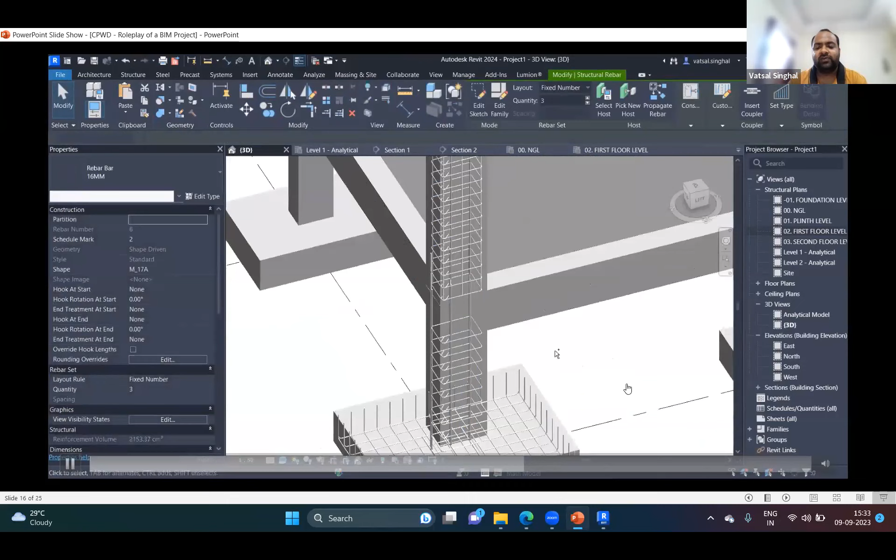Now, obviously, there is a lap over here. Again, it can be L by 3, L by 2, whatever the requirement is. You can extend these bars that are there at the bottom, or if you want to extend the ones at the top, you can extend these too. So just go to a specific view and use the extend option. So any bar property can be changed, any extents can be changed. It is very easy to do that, and it becomes very efficient.

Also, it helps us in the bar bending schedule. So likewise, we did it in the footings and in the columns, we can do it for the beams too. So a section for the beam has been cut, and in the beam part we again place the stirrups.

Yes. So after placing the stirrups, again we need 16 bar. We will take that and we'll just place it on the edges. Again, 16 bars are being placed over here.

So you can start by placing one, and then you can use the layout option, the fixed number option, or the maximum spacing option as required, then you can directly just mirror it so that these are available at the other end, right? So we'll have to follow this process again and again. We have to make things visible in different types of views. That is very important for us.

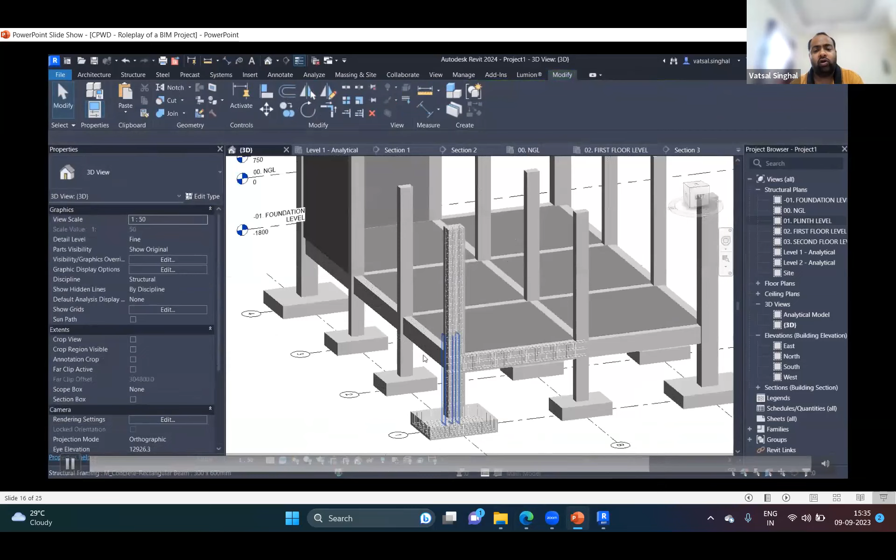So if I just take you over here, now since we've modeled everything, we've modeled one footing, one beam, and one entire column, it's not like we have to repeat this process again and again. We can just use the propagate option.

Okay, so first what we'll be doing is we'll also be using the rebar option in the wall. So for the wall, we have the area reinforcement option, so this entire area can be reinforced at once. So if I just check the area, see if it is properly within the wall or not, align it if required, and then we can just finish it.

Again, it needs to be visible, so we'll go to the visibility states again. Okay, so this wall has been rebarred properly. It can be a retaining wall or a structure wall, wherever it is required, it can be used, right?

So as I was saying, we have the options over here. We have one footing option. Now we can use this footing and place rebar in the entire portion that is there. So if you could see, this is a bigger footing, this is a smaller footing.

With the same layout rule, we can use the propagate options that are there, and place it in all the footings in the project. It's not specific that if you place it on another footing the size remains the same. You can also change the spacing for that specific footing easily.

Likewise, for the columns, you can just select the rebar in the column, and select all the columns where you want to place the rebar again, and it will be done.

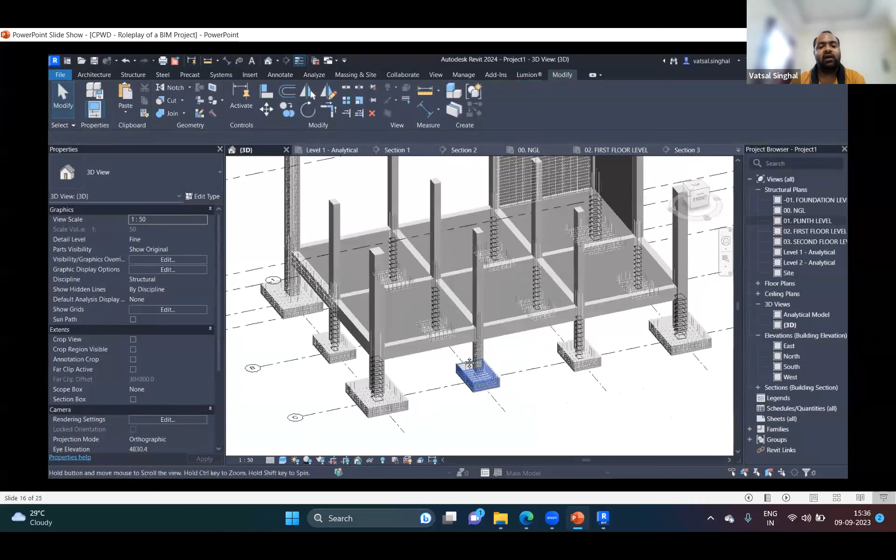Also, if you want to change the layout of the reinforcement, suppose there are 6 bars of 16 right now and you want to place 8 bars, you can go to the layout rule and place 8 bars instead. It won't hamper any other column - it would only change for that specific column and no other.

So this is how the rebar is being done, and this model has been finished easily within 10 minutes, where it takes a lot of time to do that manually. Since we have the automated system, it is done very easily.

So let me show you the final result. This is the model that we have, that we're just seeing. In this, we can also give color codes according to the requirements.

So over here, for the 12 I've given a red color, for the 16 I've given a blue color, and for the 8 I've given the green color. You can give color codes accordingly.

You can also change colors. Suppose this is green right now and I want to change it to yellow - I go to the visibility graphics option and select yellow instead.

As you can see, this is changed to yellow.

Sorry for the interruption. Yes sir, we can move forward a little bit. Yes sir, sure, thank you.

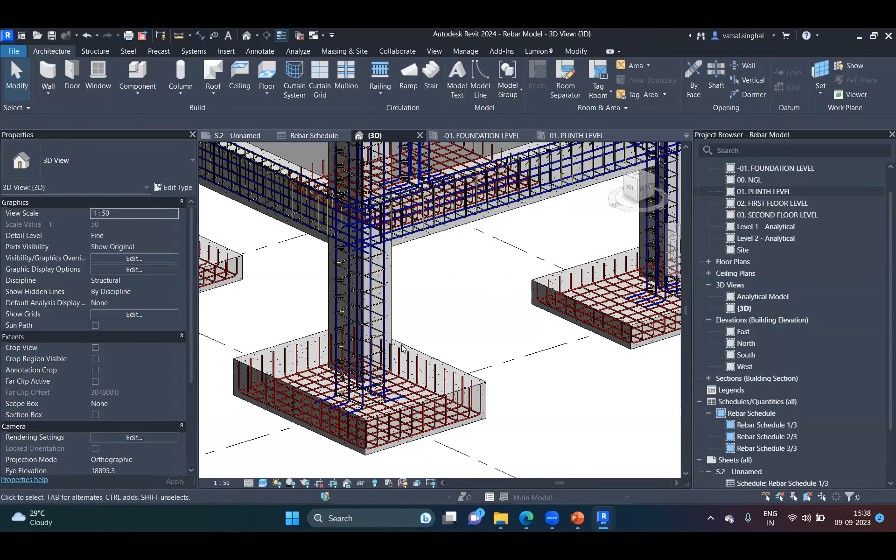Okay, so this rebar option is actually done.

Apart from that, we can create schedules. Suppose you require bar bending schedules - I've already created a rebar schedule over here. As you can see, this is a schedule for the column.

I've applied a filter, I'll just remove it first. So you see wherever you've placed bars, you get the entire schedule. There is the host category - whether it is placed in the structural columns, structural beams, structural framings, walls, whatever is there in the model, we get everything over here.

Apart from that, we have the bar diameter, the bar length - this is a single bar length. This is the bend diameter wherever the stirrups are being bent or the bar is being bent, which we've fixed to 50 mm right now. It can be changed accordingly.

The quantity by rebar - suppose there are 10 sets in a bar of 1950 mm, so the total bar length is changed to approximately 20 meters. Then we have the bending detail.

Bending detail, I'll just show it to you in the sheet. Also, we've calculated the total bar weight. Let me filter out the columns again over here.

I'll take the column - I'll set the host category equal to structural columns. So if you see, we've also calculated the total bar weight just using a simple formula used in the industry. Let me show you that formula: we've taken the bar diameter squared and divided it by 162.28.

That is probably the density of steel, and we multiply it by the total bar length. This is used to cut the units and make it unitless - that's the further process. So this is the basic formula we use in the industry to calculate bar weight.

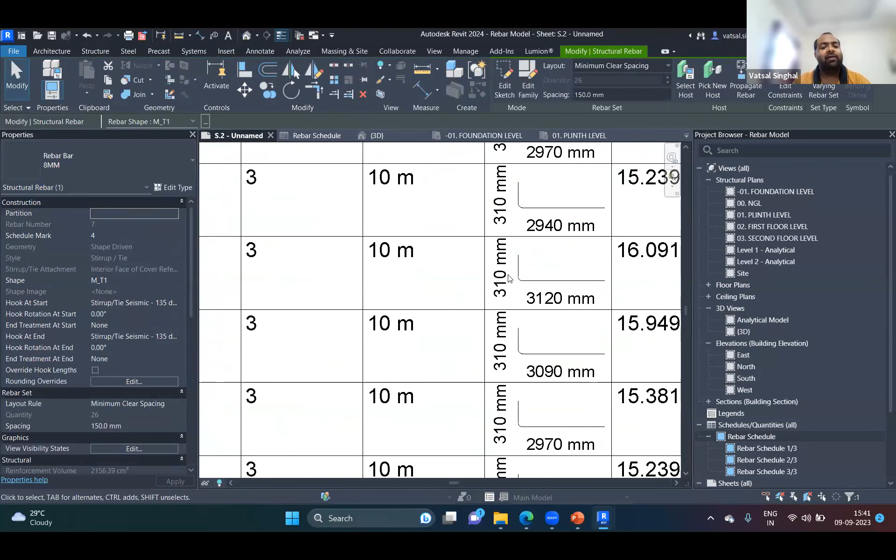So, before that, there was this bar bending schedule that we created. Over here, along with the shape, we have the dimensions that are required. This bend diameter of 50 mm is there. This length is 310 mm and this length is 3120 mm.

For the entire rebar schedule that we created, we have the sheet created for that, and we have the entire bending details that are required on site. So you don't need to create a bending detail for each and every detail. This is by default created by the software itself, so it saves a lot of time for us, right?

Okay, so just give me a minute, I'll switch back to the model.

Meanwhile, Vatsal is switching the model. One important note here: all the data which you see, all the schedules, all the bar bending schedules, everything is connected to the model. So anything which is changed in the model will automatically change in the schedule itself. So as an engineer, you don't need to worry about the outputs, and any modeling changes will automatically change the schedule also.

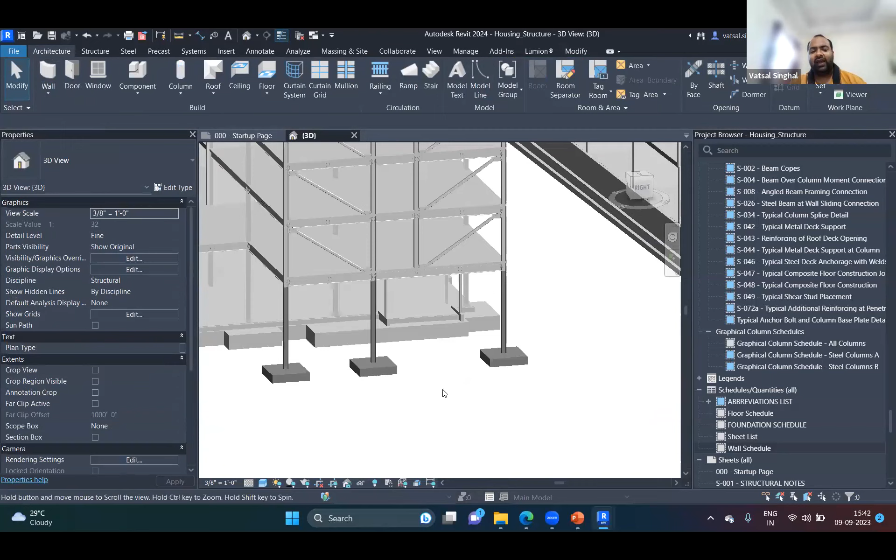So as I said, everything is automated. Everything you do in the model is directly changed in the schedules, like it was being changed in the plans, sections, elevations, it is being done the same way in the schedules as well. Okay, so we have this model over here, the model that we were already working on. This is a structure model for that. So in this model, there are usually, or mainly, steel connections that are there.

So we have base plate connections over here, there are clip angles over here, there are these tube plates over here. So we can place these plates accordingly. I'll just delete some of them and I'll just place them for you from scratch.

So suppose I'll just delete these 3 plates. So if I have to place a base plate over here, I just have to go to the steel option, and we have the capability, and we have almost all connections that are required. So I'll just show you the connection list over here.

Okay, so if I just show you the connection list over here, almost all the connections that are required in the industry are present over here. So you can just select any one of these, load any one of these, and you can use them in the model. So likewise, we've just loaded these connections and we can use this in the model.

So if I just select this over here, I just select this column, you can see this is a wide flange column and this is W10 by 33. So if I just select this, I go to the steel option and I have the connection option. Since I said we have loaded the connections, we can directly place base plates.

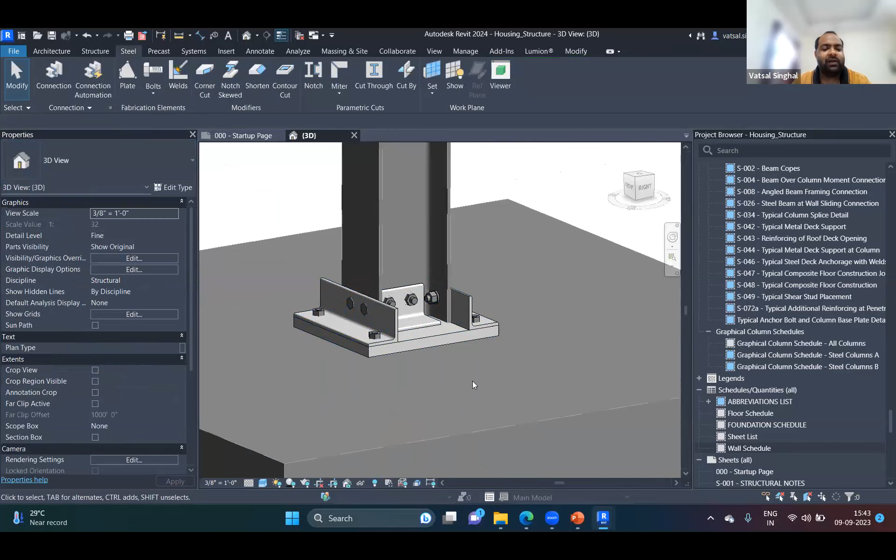So there is a base plate that we can place. So this is a base plate that we placed. So if I just select this base plate, it will also show which input element is there, so which element is being connected through this base plate. You can place multiple base plates like this by just going to these options that we have.

Right, so we have placed the base plates over here. Also, we require clip angles over here, for this column as well as for this beam. So we can just select both of them. And again, since we have already loaded the clip angles over here, we have these clip angle options: 3 vertical bolts, 2 angles, 2 unequal angles.

All of them can be catered easily. So if I just press OK, this has been placed over here. I'll just show it to you over here since this is being cut through a tube. So I'll just select this column and again the beam over here.

So there's a connection that is created between these two. And again, if you just see over here, there is the input element. For the beams, that is there, W16 by 40, and this is the W10 by 33. If I just select this, these are the two input elements that we have.

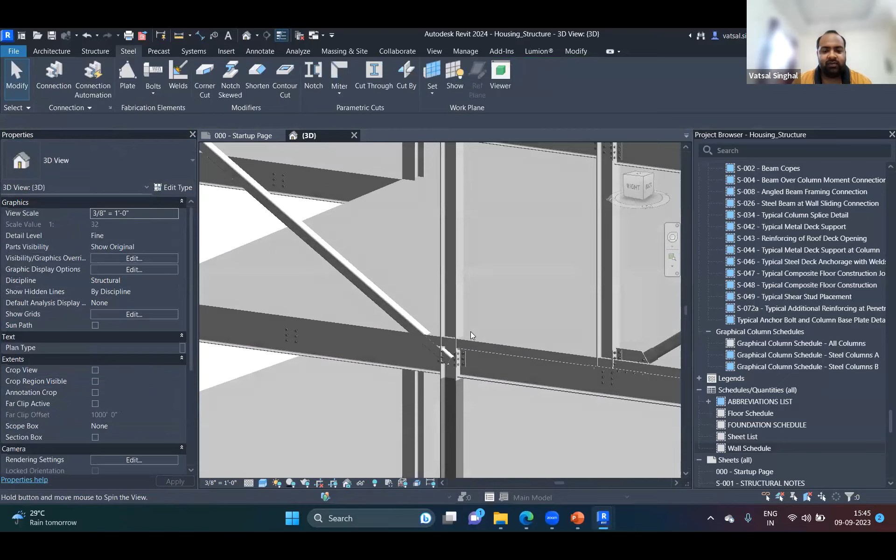Likewise, for this tube, we have a connection between these three elements, these three elements over here. So this here is the major element. So I'll just select these three together and I'll create a connection between these. I'll just create a generic connection first so that I can create and manage the main objects that are there.

Right now this beam is being treated as a secondary option, and this tube is the tertiary option. So I'll just make this beam the first option, the primary object. This as the second and this as the third.

If I just go to the connections option, I have these options for connections. This connection has been placed at the beam. If I select it again, I have all three options, right? That is how we can place multiple connections. If you see, we've almost created all the connections that were there in the model, and this is very easy and flawless to do.

In case you require any custom connections, we can also create custom connections. You can learn that later in the advanced part too. There are different fabrication elements, modifiers are there, and parametric cuts if required are there.

Now, if you see, this is a model that also has concrete elements. So in case you have to calculate the quantities for the concrete, I'll show you. I've created two schedules, a floor schedule and a wall schedule. If I go to the wall schedule, there are different concrete walls.

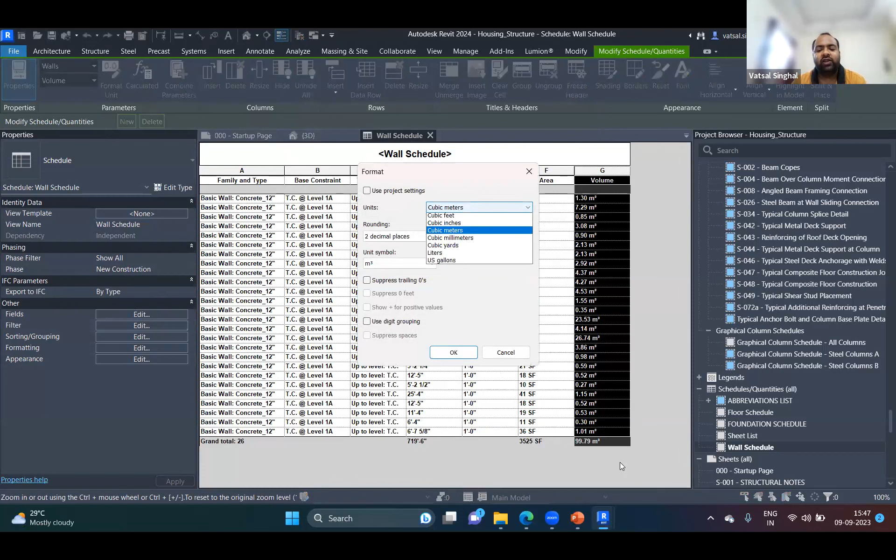If I want to change the unit, I can select the entire column and change the format unit from here. I want it in cubic feet, so in cubic feet also it is calculated. The area of the wall is calculated, you know the width of the wall, you know the length, the entire length of the wall. So likewise, everything can be calculated very easily.

Also for the floor schedule, if I show you, this is the floor that is 4 inches concrete. Again, if I go to the filter option and remove the filters, I'll be having a lot of floor options that are there. There is a precast floor, and there is a 12 inches plank plus 2 inches topping floor that is there.

But we only want to calculate how much concrete is being used in the 4 inches concrete floor. So we can again filter out all the properties that are there, as Shoaib sir said, that are in Excel - we also have them over here. So we can just filter out the 4 inches concrete. Also, if required, we can transfer this data to Excel, which can be easily done later on. So we have the volume, and again, as I said, you can change the format units easily.

Now, after creating the schedules and everything, the main part that comes into consideration is the working drawings. So let me show you the working drawings. We can create the entire working drawings over here.

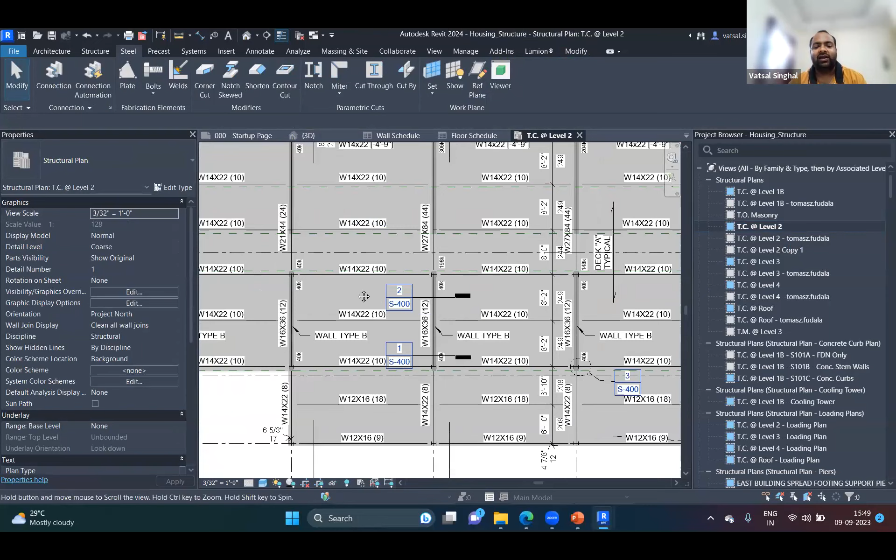These are tags. This is a tag option that is there in this software by default. You can directly place any number of tags over here - you don't need to create any issue with that. So I'll just duplicate this and show you how we can place tags.

So this sheet is blank right now. I need all the beam tags or the framing tags over here. For that, I can just tag them all together using the framing tag option. You can see all of the framing tags have been placed at once - you don't need to select everything and write text manually. It gets done within a second.

We can also transfer this data to a sheet in case we want to print it. So we have the sheet ready for that, and this can directly be printed onto the sheet. So that is all from my end, from the structure end.

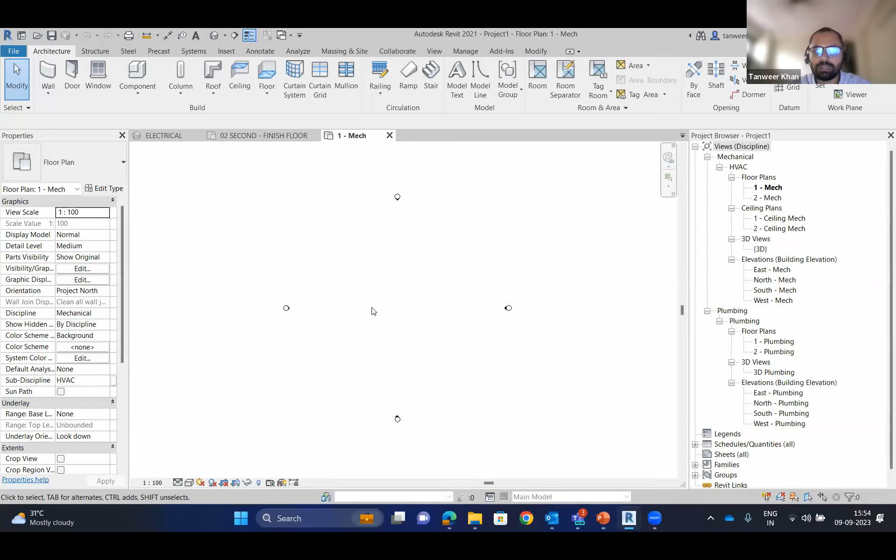So let's suppose if I'm taking any views, I'll quickly show you the workflow here. We'll be bringing in the architectural file which we have received, so I'll just browse it here. This is the sample project, the architectural file.

Here we will be deciding what will be the position of this file. This data will be obtained from the architects, whether it will be by shared coordinates or internal origin to origin. So I'm considering internal origin to origin, and I can go ahead with this.

So if I select this model, it will act as a single entity. It's just a reference file, a complete block. Once we have linked this file, we can pin it so that it doesn't move.

Okay, once it is pinned, we can go and collaborate with the architectural file, because this file will be receiving updates multiple times, and we might receive some changes also during the process. So that is why we need to make a coordination with the architectural discipline.

So that is why we do what? We copy and monitor this model. For copy and monitoring purpose, I'm going to copy multiple and monitor all those levels, so that I'll make sure that if any changes are done in the levels itself, I'll be notified. So Revit will intimate me instantly if it's changing. I can make sure, so I have selected the levels.

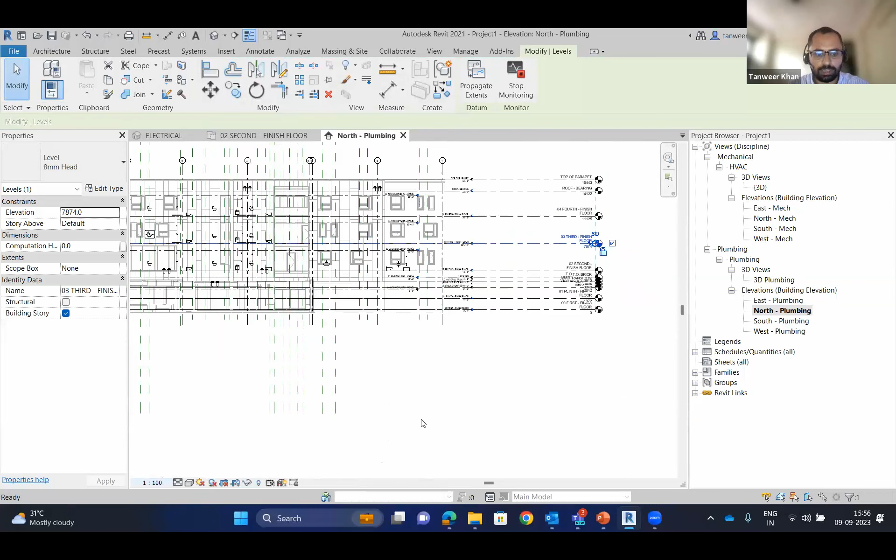Okay, so if I show you, let me just turn off this reference plane. See, these are the two levels actually. And if I show you, you'll notice a small monitoring sign is there. Here it is - a small monitoring symbol for each level.

That means the next time when we receive the updated file from the architect, and let's suppose he has changed these levels, we'll be notified instantly here. So even if I slightly change my levels here, the kind of error I'll be getting is a coordination monitor alert saying level moved by 200, and it will be reflected within that project also. We can anytime change this within the coordination review.

I can select the link and check it. So this is what we have done. So what action do I want? Let's suppose we have done with the HVAC part, the duct layouts, and levels have been changed. So what action do I want to take - whether I want to postpone, whether I want to accept, whether I want to move the levels. I can add a comment also here, and create a report out of it, and share it over mail as well.

So this is a basic coordination which I wanted to show you. Next, I'm not saving this as a project, I'm just closing it. For HVAC, let's suppose if I want to create any model here within this project.

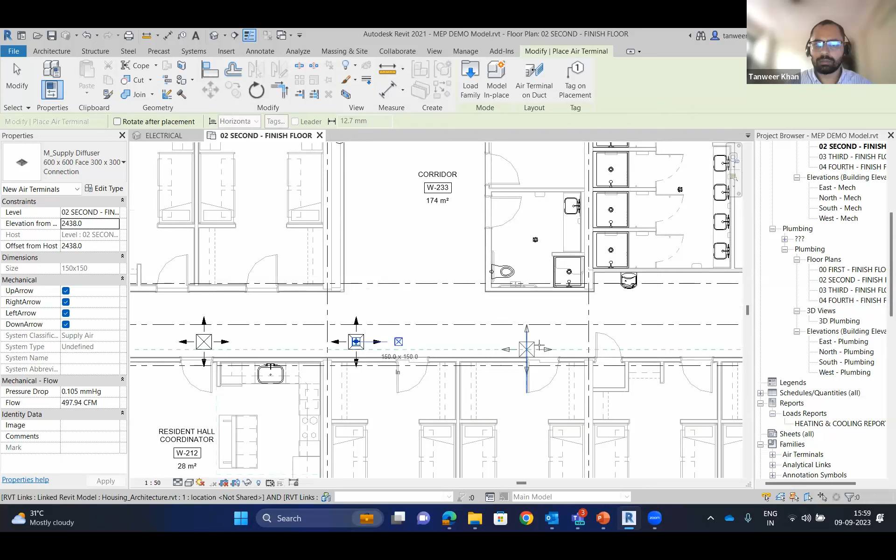I can place some supply diffuser at finish floor level. This is at 2438, so I can take these levels 2438 here, and I can place them multiple times like this, and here we have here, here, okay, and here.

So these are supply. In front of them, I can place some return also. Since all of these are parametric families, I can change the size, diffuser width and height, everything can be controlled. Their neck size and face size, everything can be controlled from here. Right next to them, I can place them.

So levels I have not given them for this return diffuser. I can select all of them at once, and I can give the level as the ceiling level, which is 2438 actually.

Okay, so for creating any duct layout, since we are working in a 2D plan which will be producing 3D, we only need to specify the width of the duct, the height of the duct, and we have a system type for what type of air it will be carrying, whether fresh air, supply, return, exhaust, or pressurized. So I can take accordingly here, and I can provide the middle elevation or bottom elevation of this duct.

I can simply draw, let's suppose, and I can place some equipment here also. Starting from here, let's suppose, after catering this, if it is reducing till 700, I can go like this. It is reducing also. Automatically it is placing a transition piece.

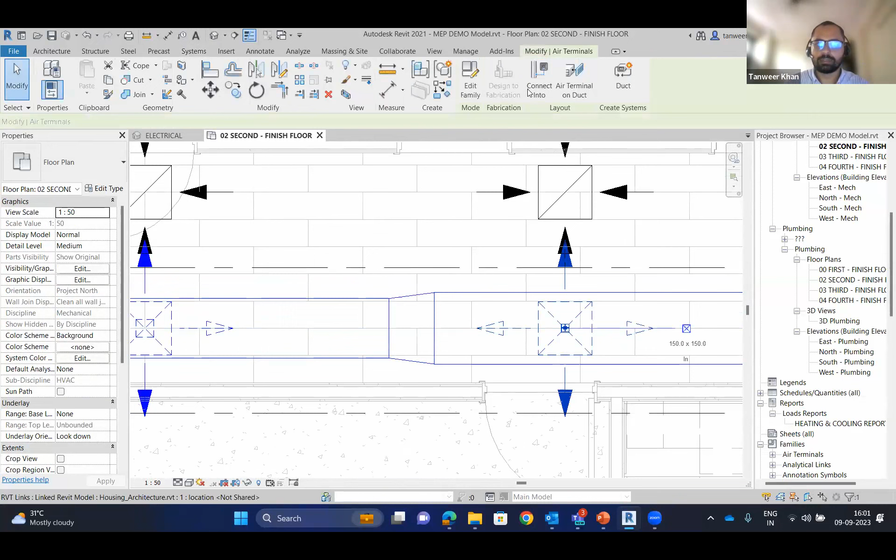So once we have connected, we can take a pressure report, we can check for the flow, everything if we want to. If further at detail stage we require, we can go for it.

Okay, so let me just place our equipment also here. If I'm placing any vertical AHU here, let's suppose we have an AHU room here, and let me place it on the floor plan, and I'll just make it here. So if I want to take out duct from here, I can simply click on the supply.

It has multiple connectors. Every mechanical equipment, pump or chiller has a connector specific to its system type. Just like this, it has a chilled water supply, supply air duct, return air duct. You can also see a P trap here, which is for drainage. And then we have this for electrical connector also, it has 240 volt, and this is of 14,000 watt of load. So everything is there in detail.

So if I want to draw a duct here, ideally I want to come up till 2900. So I'll come to 2900, hit apply once, and I can go like this, and I can come back, and I can connect with it. It is automatically taking an elbow also. You can control this bending radius of the elbow as per our requirement, we have multiple options, we can take as per our requirement.

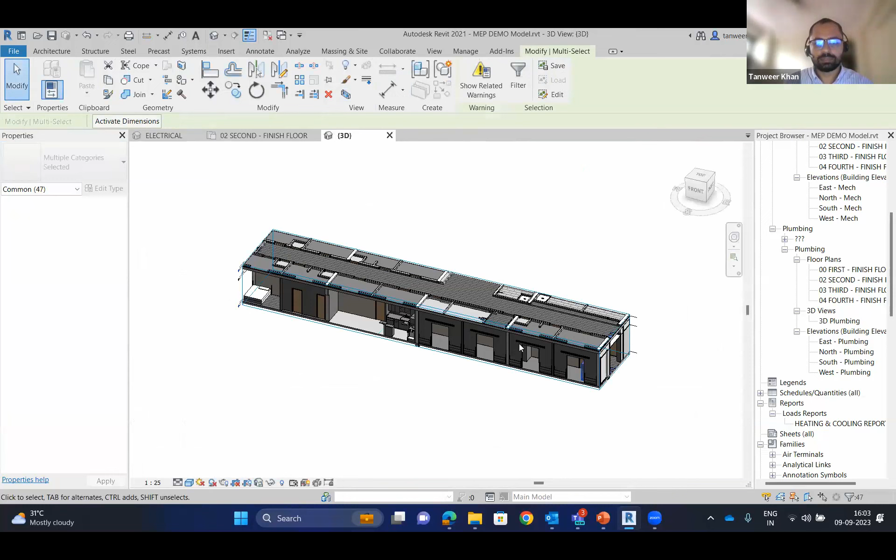So now this has been connected. So if you check this, you can see that here, this is our equipment.

I'll just make it consistent color. So we have placed our diffusers also here. You can check it, the connections are there.

Even if I change it to mechanical, you can check it here. This is how you can create your system. And these are connected. If you want to check your connections, we can check whether it is connected or not. Yeah, everything is getting selected.

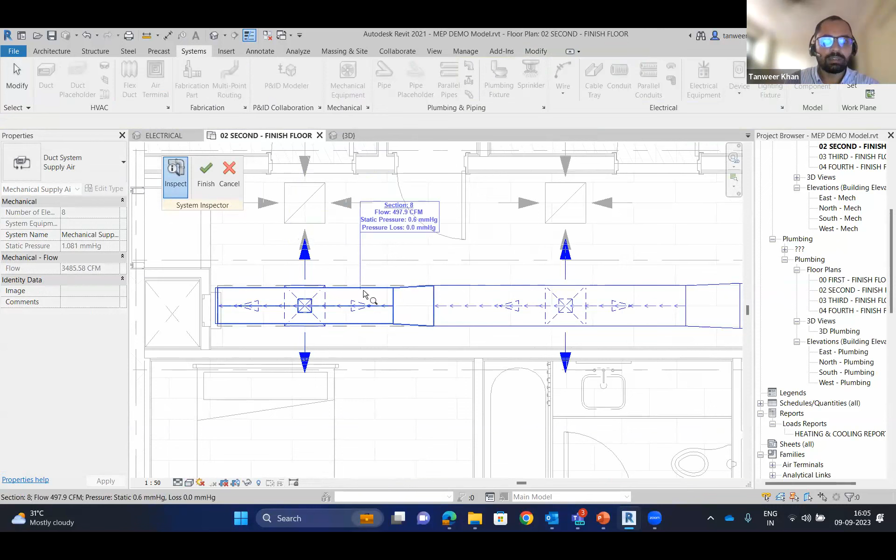It's an entire system. So once we're done with this, we can come back and take a report out of it. Let's suppose we want to check the pressure report, or inspect the system to see how much air we're getting at what part. Let's suppose this diffuser has a flow, it hasn't been provided, but if I see here, yeah, it is there. So it is 497 CFM. You can check it here. Okay, so everything is here.

But if I come here, these two are added, so now the flow is getting added to 995 CFM. Similarly here also, so at any point or any diffuser, you can check. For this diffuser also, we have given 497.

We can anytime control and make changes to the flow rate also. If you want to have 600, you can change the flow to 600. And now if you change and inspect it, it will be inspecting 600 CFM here.

So since I said, you can inspect the system as well. And if I want to have a pressure report, I can click and create a duct pressure loss report. What parameters do I want? Flow, size, velocity, length, coefficient, and friction. Everything is there. So I'll just quickly generate the pressure loss report.

I'll just write it and I can save it. And I can open the pressure loss report here. So here you'll see for every fitting it is taking from ASHRAE, and you can go for this.

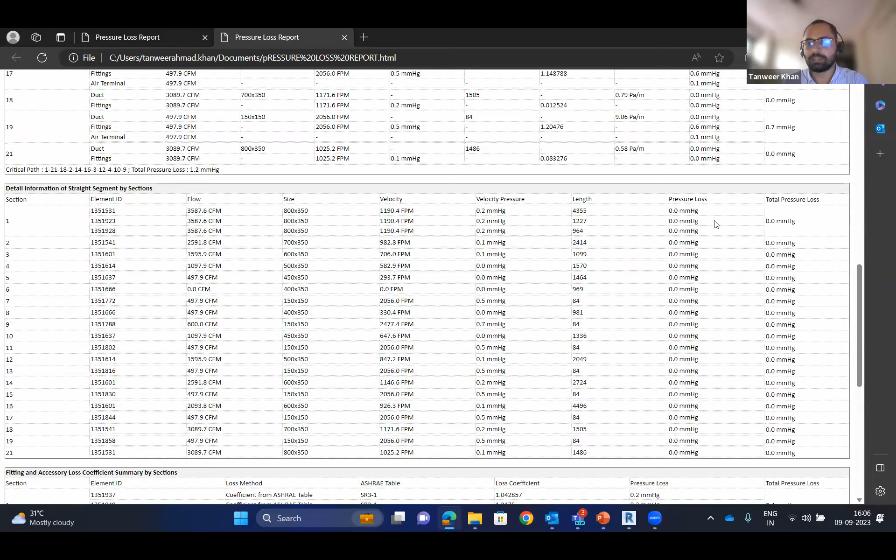For this critical path, it has automatically, this is falling for 1.2 mm pressure for total, for the critical path we are getting. For detail, for every element, here it is mentioning for every part, this much of flow is there, this much of size, this much is velocity, this much of pressure, and this much of the length of the duct. See, so total we have added. So these are for fittings and accessories as well, if we added.

So for report also we have seen for inspect. So when we do the concept stage, we can also create a heat load report out of it once we have received the file from the architect. So here I have already taken out the reports. If I click on here, you can see this complete report here.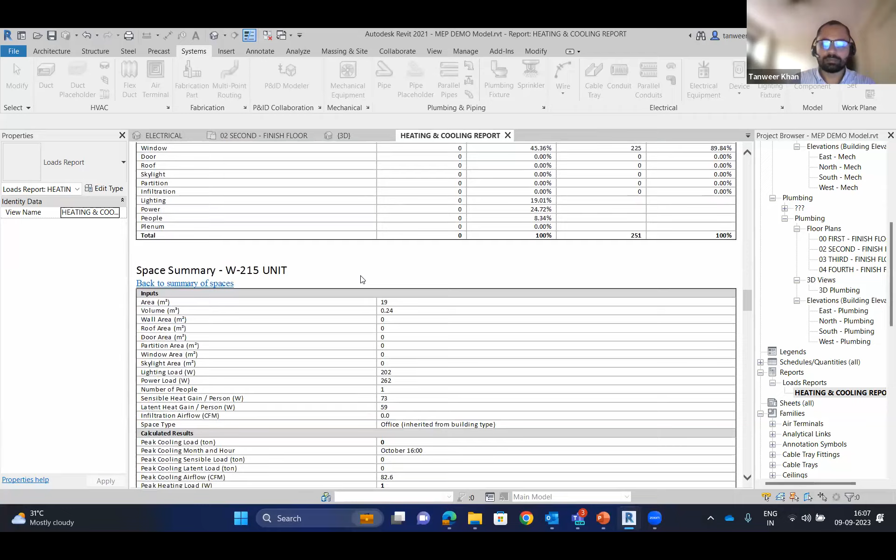So you can check with these reports. So this is the entire report which has been taken from the software itself.

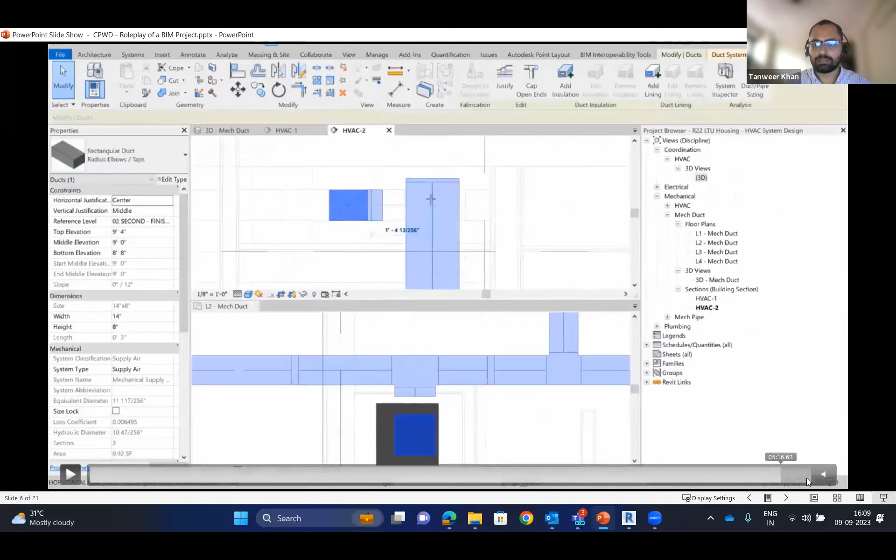This is a mechanical setting. We can set this for automatic layout also. For concept stage, we can select the duct type, and at concept stage, we can create an automated layout. We just need to place our fixtures, air terminals, and equipment. It will suggest multiple layouts, and accordingly you can choose whichever feels convenient, more appropriate.

Okay, so here we can create systems also. If we go for detail stage further, we can create a system name, provide it, and we can go with this. One more thing we can do is duct sizing as well if required, and it can be done both ways.

See, this is the automatic layout it is suggesting here. It has different solutions. If you change whatever you feel like, you can check it, and it will convert it. You can edit this layout also as per your requirement. Let's suppose if I stretch it down, see, and this shows the default solutions here.

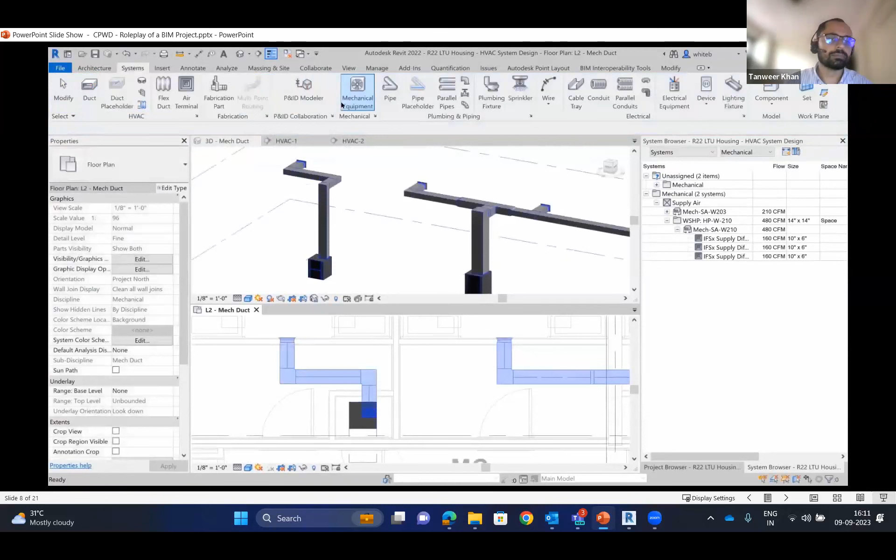So this is kind of the concept stage. This is automated layout we can create. Currently, we are getting 6 solutions here, out of which for custom, we have 1 of 1. You can finish and it will automatically generate the duct. This is usually done at concept stage, where we are not much concerned about sizes and all.

Once we have done with this layout, we want to go for the duct sizing. So here also we can choose whether we want to do the sizing as per velocity or friction or both, or a static regain. We have an option, and we can restrict whether we want to change height only or width. So all those things can be done here. We have an option, calculate size only.

You can click OK and it will change the sizes of the duct. See, the sizes have been changed as per the velocity. There might be some manual intervention required, which you can do later also.

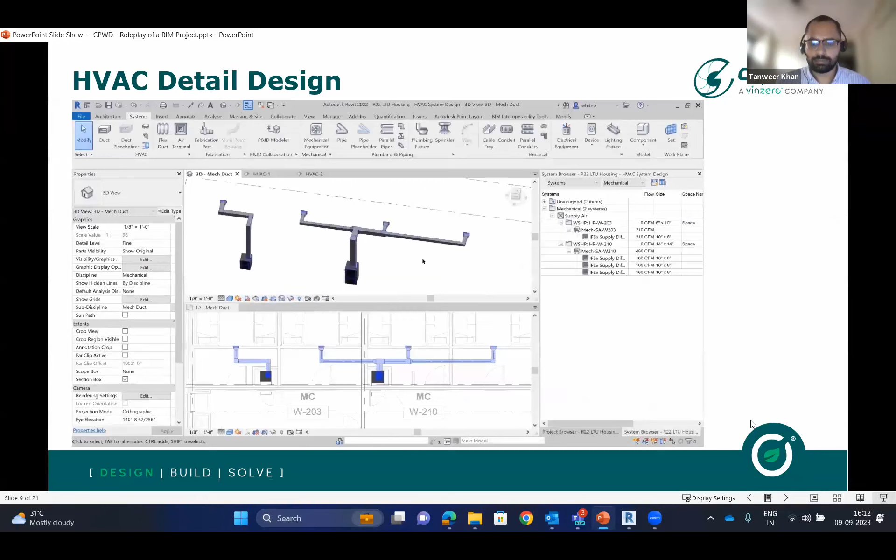For plumbing also, we can provide pipe. Just like we have created duct, we can create pipes as well. We can provide slopes to them depending upon our requirement, how much slope do we want, and we can create pipe. So for piping also, we can select the segment, whether we want to go for a chilled water pipe, and create a schedule called mild steel, carbon steel, everything we can create. And for PVC also, we can have our own different PVC fittings, everything we can control.

We can do the piping connection. Just like this, we can take the dia of the pipe, system type of the pipe, and we can do the connections.

So here you can check the slopes also within this pipe. How much slope it is showing, 1%. If you want to change it, you can change the slopes as well. And the unit of slope also you can change as per your requirement.

Internally, any units you can change from percentage to per mille, you can change it.

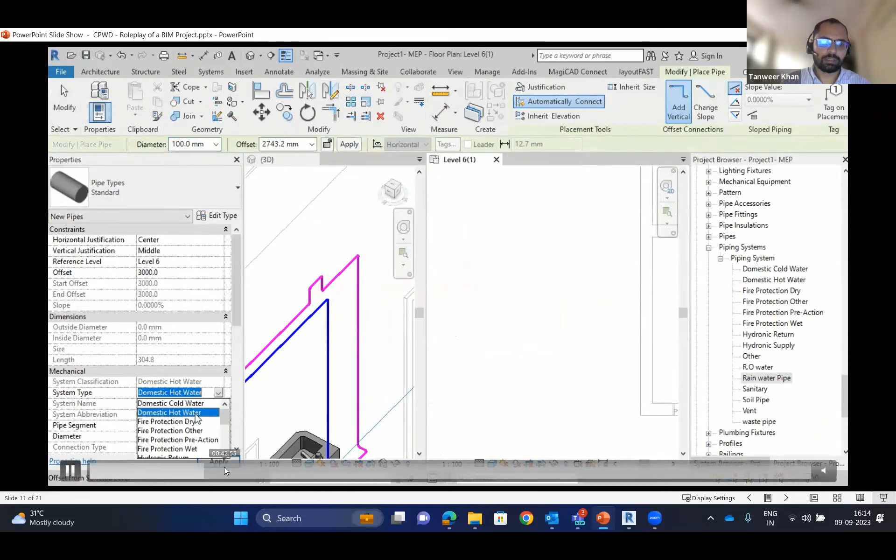For plumbing connections also, we can do the connections. Dia of the pipe we just need to provide, elevation, offset, and system type, whether we are creating a water supply or a drainage. So here you can see we are creating a domestic hot water, and we can connect with them.

Hi, Tanweer. Yes, I think we can go a little bit faster. Sure, sir. Conclude maybe in the next 5 minutes. Sure, thank you. Yeah, so this is what we can do with the piping.

Here you can see this routing preference also. Pipe segments, every fitting is there. T, junction, transition, everything we can control as per our requirement. So different fittings are also there for pipes, like welded fittings or flange fittings or groove coupling. Everything can be done. We can download if we don't have the family.

So many manufacturers like Ashirvad, Victaulic, Vikings, they are creating their fittings also. We can simply download and load it into our project and we can create.

These are pipe accessories for different valves we can place, whether for plumbing, HVAC, or fire systems. We can place a check valve, and it will snap to the size of the pipe automatically. You just need to place it, and it will snap. For butterfly valves or any valve, depending upon the type, you can check it, and it has been placed.

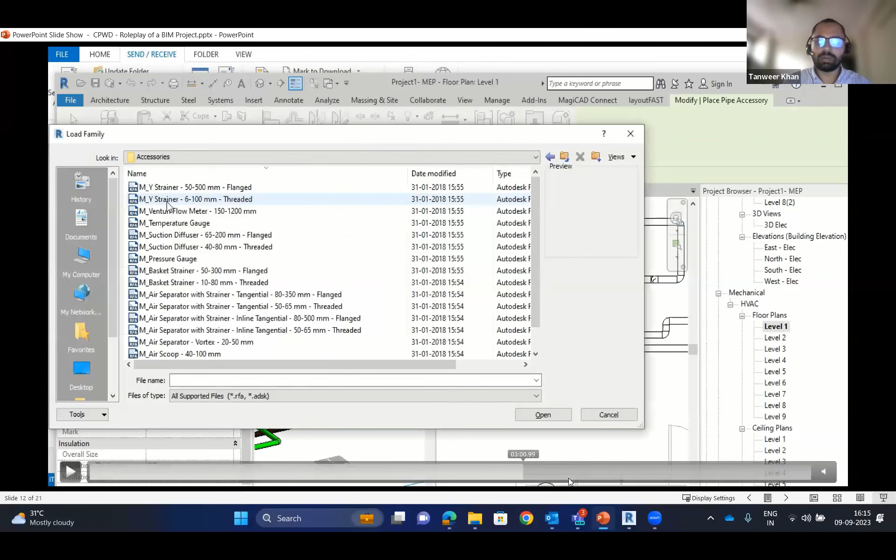So it has an entire library of valves by default. You can use it, or you can download more, and definitely you can create your own as well.

Pressure gauge, temperature gauge, you can see. So these are different fittings which are from the manufacturer, and you can load them.

These are the lighting fixtures, which you can download as families and use into your project. Different families are available.

The sheets we can create. This is the duct quantity we can calculate. Electrical panel schedule we can also have, and we can create panel schedules for every panel. Before we go, I want to show you the 3D of every discipline here.

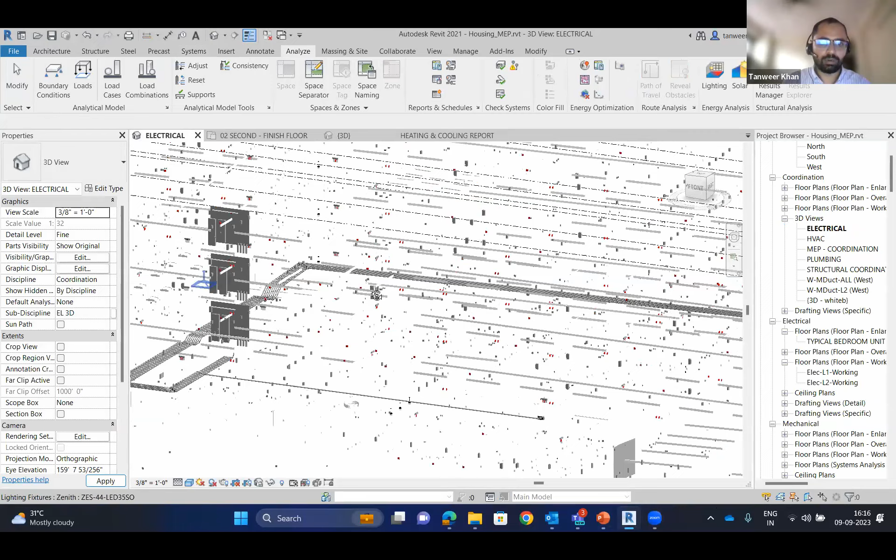You can come back to the reports and schedules which have been generated. This is the electrical model of this project, and you can see the conduits are there.

Fire alarm parts, horn strobe, lighting fixtures - you can check it.

Similarly for HVAC, I have segregated 3Ds for different models. You can check this HVAC - we have a water source heat pump. Everything is there. For plumbing pipes also, you can see, check the fittings, P-traps, everything.

For plumbing, if I show you separately, you can check this, and you can see the WC has been connected, floor drain, wash basin. Check with these pipes also.

If I show you the coordinated view of this project, this is the entire coordinated view, including the plant room here.

So now I'll request Tushar, who is role playing as project coordinator, to take over from here. Okay, you can take care from here. Yeah, thank you.

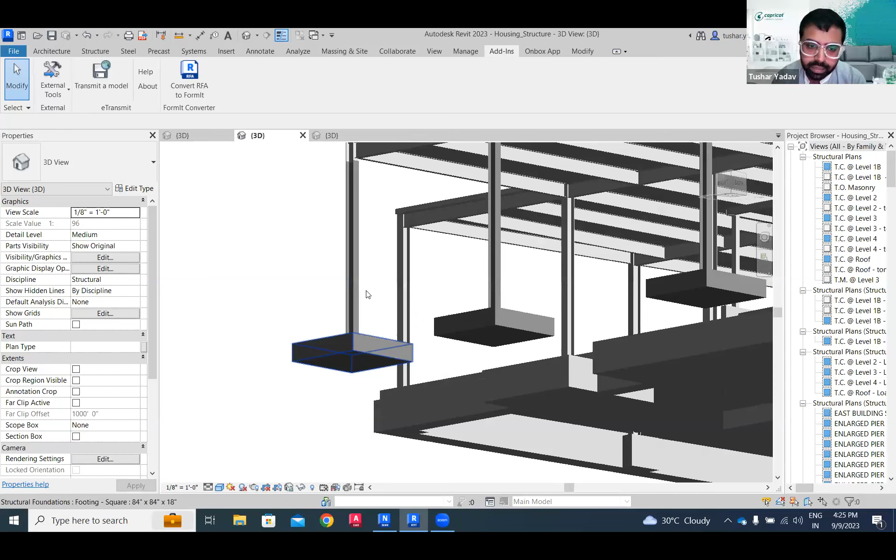This other model is a structure model - let's say this is from Vatsal. He has done everything, the rebarring and all. All the columns are there, footings are there, as you can see.

And the last model is from Tanveer, from the MEP team. This is a complete combined model of the MEP services, where all the ducts, HVAC, and all the plumbing pipes are there.

So now what I'll do is open my Navisworks software over here. This is a BIM software used for checking clashes.

The idea here is that we can detect the clashes in the software itself and resolve them in the software itself, rather than resolving them on site, which would be time consuming and a lot of money would be spent. So to save time and money, we can check for clashes between the three disciplines over here.

So what I have done is created an NWC file. We have an external tool for that - we can go to add-ins and quickly convert by clicking on Navisworks, then click to make the NWC file. This file is very light in size, reduced by up to 80%.

So I'll append the files over here - these are my 3 NWC files. I'll quickly open them together and get the combined model. Once combined, I'll show you that all the pipes are there, the columns are there, and the architectural elements are there. You can see the MEP elements over there on the terrace, and you can even see the pipes here, which are perfectly fitted into this project.

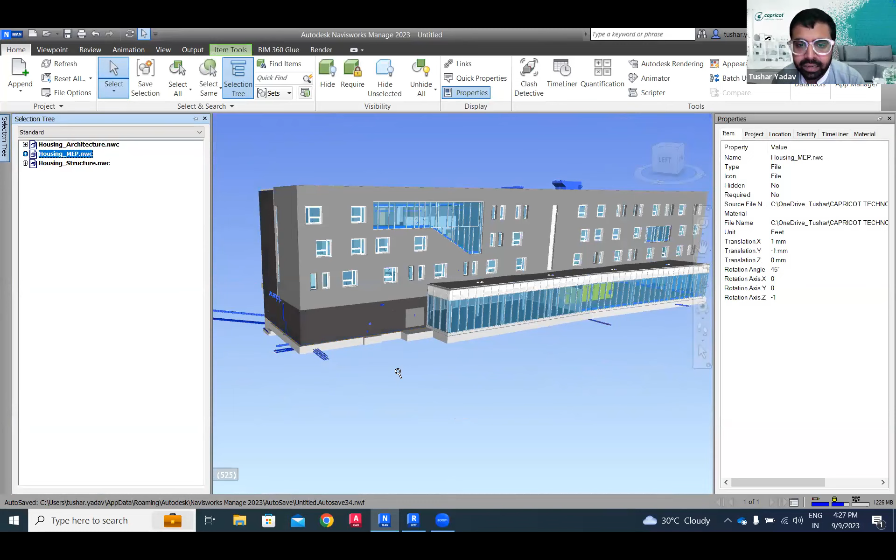Now there is a selection tree, so I'll open this tree. These are my 3 NWCs: the architecture NWC at the top, then the MEP NWC, and then the structure NWC. If I select the architecture NWC, all my architectural elements will get selected and turn blue. If I select my MEP NWC, these pipes have gotten highlighted and turned blue. And if I select my structure NWC, my structural elements get highlighted. You can see these footings are getting highlighted.

Now I want to show you that clash detection is very quick. In just a few clicks, you can do the clash detection between all three disciplines. So I'll click on this clash detective option, and I'll go to add test.

Let's say I want to check the clashes between the structure and the MEP discipline. I want to check if some beam is intersecting with some HVAC duct, or if some pipe is intersecting with some structural wall. So let's find out.

So I've added this test. This is structure versus MEP. Now I'll select my structure NWC in selection A, and in selection B I've selected my MEP NWC. Now I'll click on run test, and you will see how quickly it detects the clashes. As you can see, we have 886 new clashes.

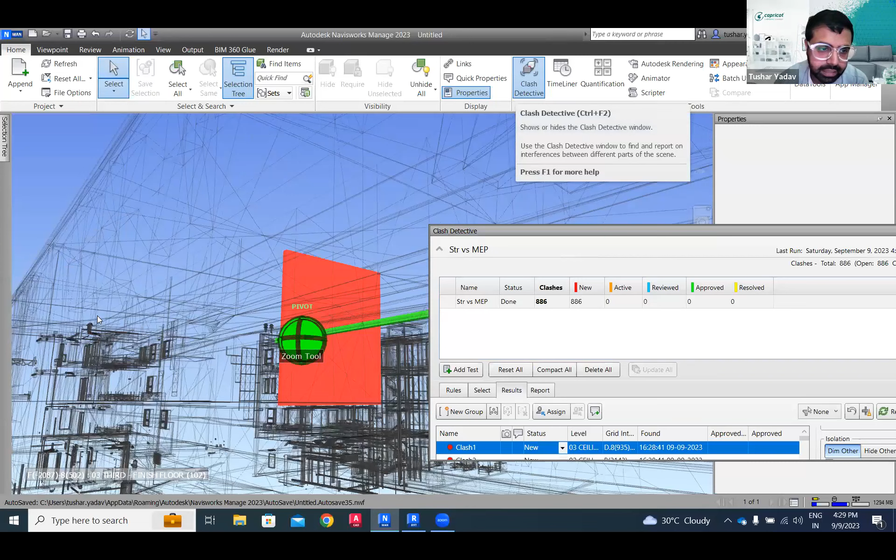So if I slide it a little, make this window a little smaller, you can see this is a structural wall, and this HVAC duct is passing through this structural wall. So this is a clear clash. You can see this clash. The duct is passing through this structural wall.

I'll show you some other clashes also, 2-3 other clashes. You can see this particular pipe is passing through these beams. There are no sleeves provided for this pipe to pass. So we need to provide sleeves in the structure, or you need to change the route of the pipes to incorporate into this particular design.

Same way, if I go further down, here is another clash. You can see this little pipe is clashing with this structural slab. So we need to resolve all these clashes. It is very easy.

So what I will do is select these clashes. Let's say I want to select the first 50 clashes, and I will assign it to Tanveer sir because he is the MEP consultant. I'll click on this assign button and write his name, and I will add a note: please resolve. And I'll click on OK.

Then I can generate the reports. It's very easy to generate reports. I'll click on this report option. We have various different formats for the reports. So you can see this report format. I have various options.

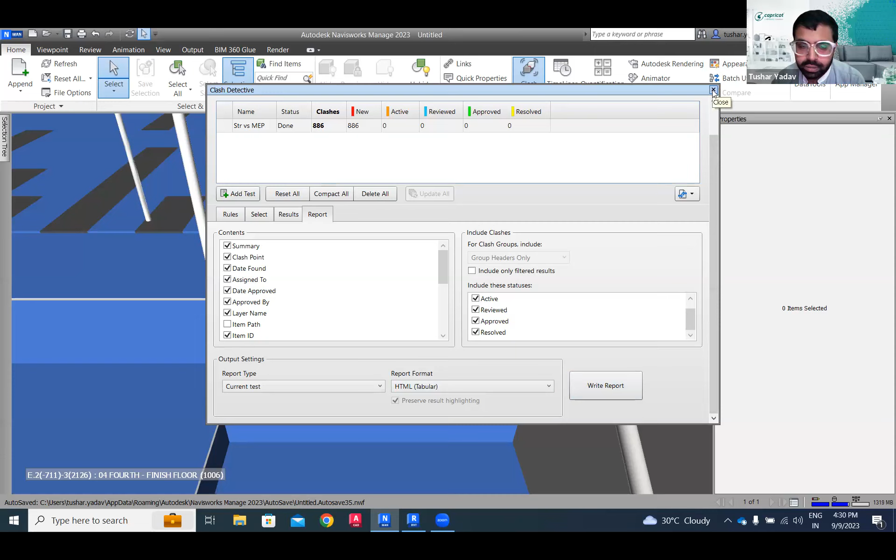I have XML, HTML tabular, text, as viewpoints. So we will go with HTML tabular. I'll click on HTML tabular and click on write report. To save time, I have already saved a report, so I'll show you what that report looks like. I'll open that report for you and share it.

That report will include the date and time, at what time and what date the clashes were found, and what the clashes were. Along with that, we have the element ID. So what will Tanveer do? He will search that particular element ID in Revit, and the particular element will get highlighted, and then he will resolve the clashes. But he needs to link the structure model along with it, and the architecture model as well, and resolve the clashes so that it doesn't clash with any architecture or structure model.

Then he will produce a NWC. He will again convert the MEP model into an NWC file, and then we have to again run the clashes to see if they have been resolved. Also in the report, you can see a snapshot of the clashes along with the clash ID. You can see that this is a pipe which is clashing, and over here, these are all pipes, and then this is a duct which is clashing with the structural wall.

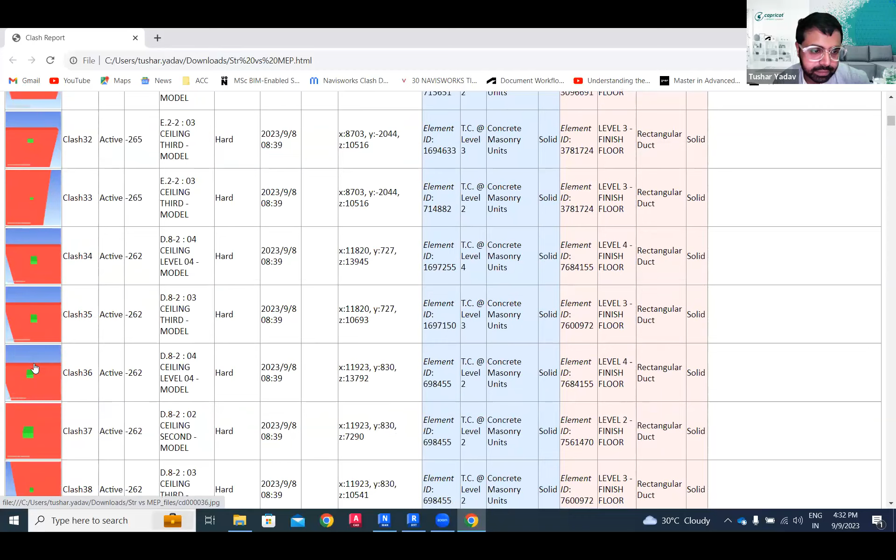So it's very easy to find the clashes between the different disciplines, and then to resolve them in the design authoring software, that is Revit. So that's how the clashes work.